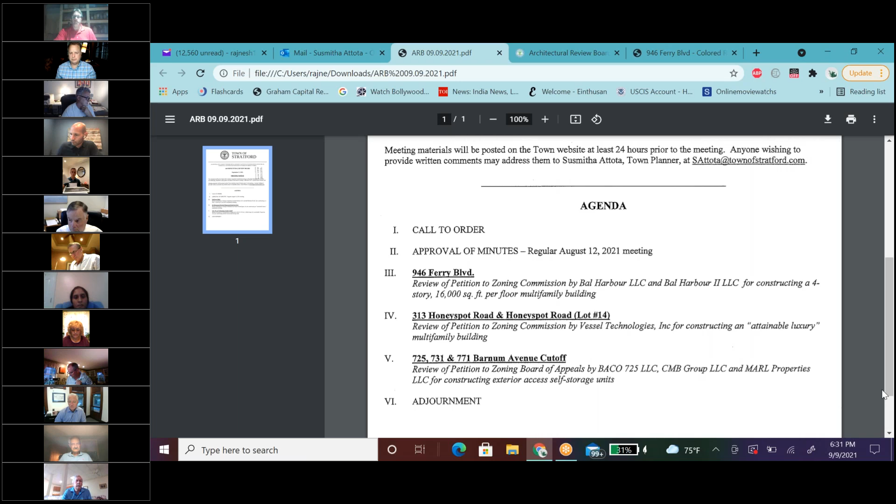I'd like to make a motion to approve the August minutes as recorded. Second? Second. Steve Law, all in favor, say aye. Aye. Aye. All opposed? Meeting minutes approved unanimously. Next on the agenda, petition of 946 Ferry Boulevard, review of petition to zoning commission by Bal Harbour LLC and Bal Harbour II LLC for constructing a 4-story, 16,000 square foot per floor multifamily building.

I'm not sure who's taking the stage here, but why don't you guys take it away? This is Paul Sobel. I represent the applicant, and we have with us tonight Anthony Salsi, he's a principal. I'm not sure if Tony Nazzaro is on yet, he is a principal. We have John Cruitt, the project architect, and David Bjorklund, the project engineer.

So I can start by turning it over to either Dave Bjorklund to review the site plan or John Cruitt to review the architecturals, whichever is the pleasure of the commission or the board. Either or, up to you guys, however you'd like to proceed. Hey, Dave, how about if you begin with the site plan?

Yeah, so I'm going to make Dave the presenter. Dave, do you have drawings on your screen, or do you want me to share my screen? If you could share your screen, that would be preferable. Okay, 1 second. I think Susmitha has the S1 layout, that would be the one I would want to work from, and she also has the landscape plan. So which one do you want me to open here? S1 layout? Yes, please. Okay.

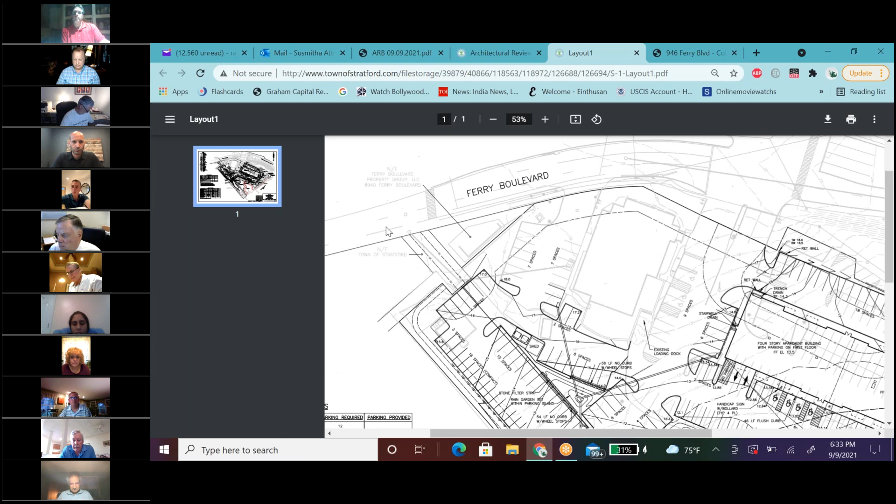I'm sure most of the members know, my name is Dave Bjorklund. I'm president of the firm of Spath Bjorklund Associates, and we have offices in Monroe. We are the civil site consultants on this proposed development. We're working in coordination with Davison Environmental with regards to the tidal wetlands located on site, and with Environmental Land Solutions, Matt Pop, who has done the landscape design. I think everybody's familiar with the site. This is the site of the River Bistro restaurant, and then there is a large parking area associated with it.

Just 1 second. For the record, I want to announce that committee member John Zabel has arrived, because when we are voting, I want to be very sure that all members had the same information to vote from. Okay. All right, you can continue now.

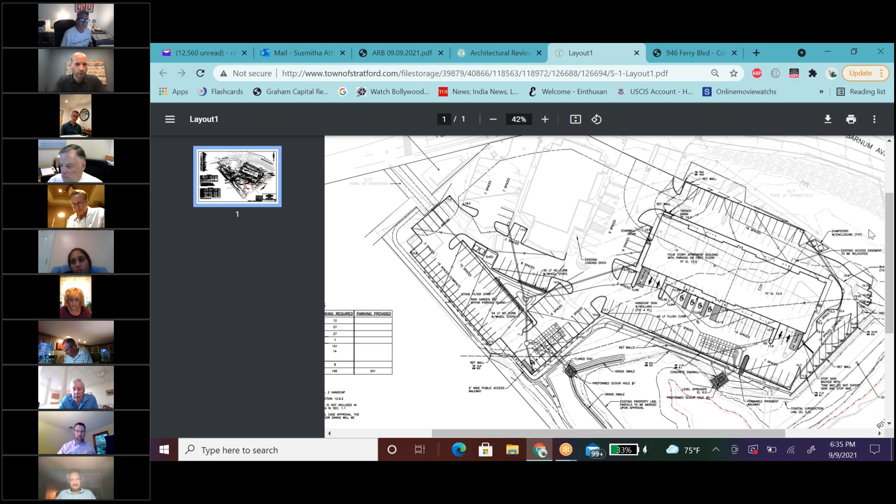The proposal here is to maintain the existing restaurant as it is today, in its current location. And then there's a large parking area which was developed years ago to the east of the existing restaurant. The proposal is to construct the apartment building on that existing paved area. We're not encroaching off of that paved area. There's also some waterfront improvements. There's a boardwalk that runs along the river and access to a dock that runs down to the river that will provide public access to the river.

In the previous approval of the restaurant, there were to be 8 public parking spaces designated for public use and access of the public to the water. This plan does recognize that proposal, and those parking spaces are located on the southeast side. They're located, you can see them, just southeast of the existing restaurant.

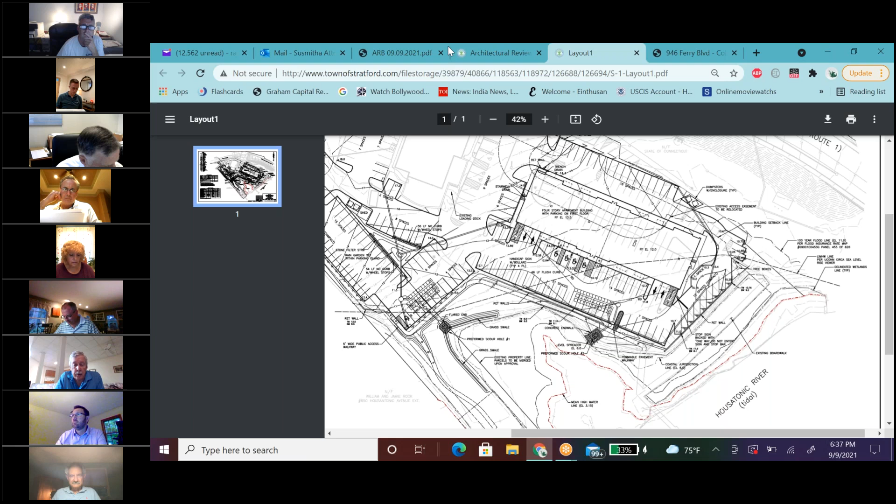The access to the Ferry Boulevard, Barnum Avenue cutoff is the same. We're not proposing to fill any of the tidal wetlands. We've recognized the mean high water mark. We have a very detailed stormwater detention plan that is part of the proposal that complies with DEP requirements with regards to detention and water quality. So if you visit the site today and see the tidal wetlands to the south of the existing paved area, there's going to be no change in those. We are proposing to have parking under the building, which I'll let John Cruitt get into. This is going to be served by existing sanitary sewers on the site and public water.

That's basically a rundown of the site. I'll turn it over to John now so he can talk about what I think is probably more important to the ARB, the building itself.

John? Okay, well, thank you very much.

Physically, the proposed project is a 4-story building with 16,000 square feet per floor.

Excuse me, John, for one moment. Which drawings or set of drawings would you like to have on the screen when you begin your presentation? The major difference between what was submitted to the Architectural Review Board and what I have is that I actually have catalog cuts of some of the materials that I propose to use. How important that is, we'll just play by ear.

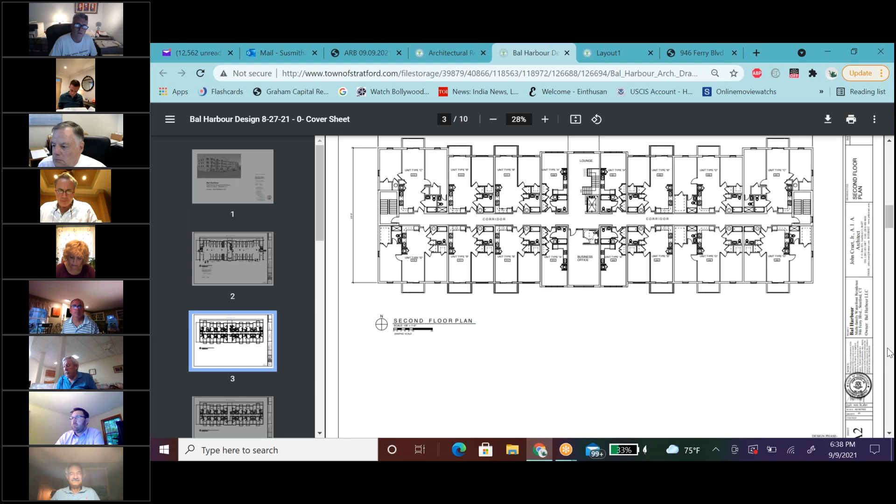Just for your information, Susmitha now has the August 27 set up on the screen, and that includes the latest roof plan set of drawings. I am very pleased and gratified to hear that, because one of the principal exhibits, which wasn't submitted earlier, was the roof plan.

The roof plan has some importance because we do propose to locate outdoor sections of mini splits on the roof, but I'll try to get into that particular aspect of the design a little bit later.

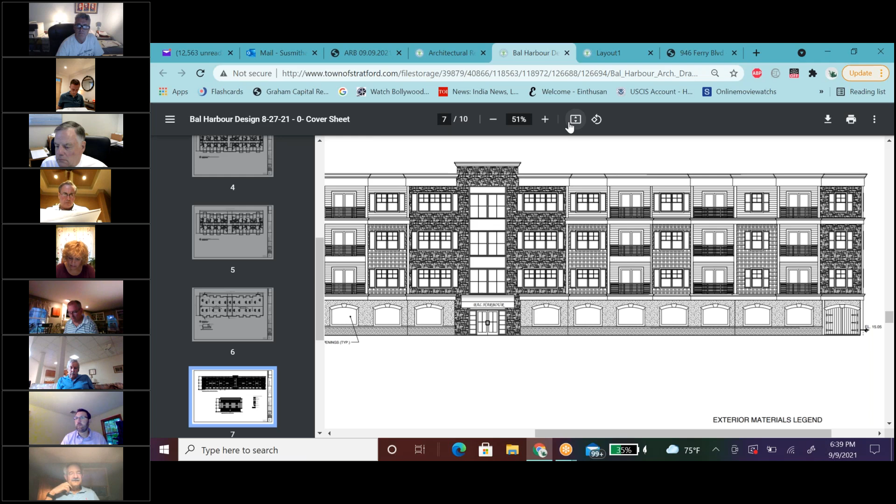What I want to try to do is go over the design, the massing, the elevations, what I propose to use for the various materials, the philosophy that is the backbone of this design, and other factors. So if I may, if you have a picture of the perspective, if you could put that up, that would be appreciated.

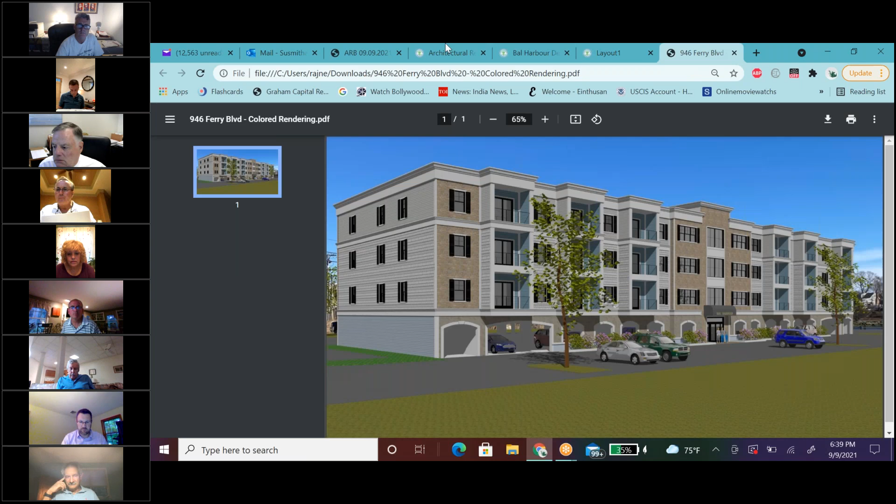Susmitha, would you be able to put up the color rendering? Yeah, can't you see it? There it is. Excellent, that's perfect. Yeah, it's just like my color rendering, so that's just fine.

The reason for that is it makes a good introduction to what I propose. The proposed project is a 4-story, 16,000 square foot per floor multifamily building with a mix of studio, 1- and 2-bedroom apartments.

One of the aspects of this particular project is I wanted the building to be elevated for a couple of reasons. One, because it's in a flood zone, and the flood zone allows us to park underneath the building and have our main entrance at that level. So the building is basically elevated some 12 feet above the existing grade.

This affords other opportunities. The elevation that you see is the southward facing view, and they have a very clear view of the lower Housatonic River and also Long Island Sound.

Now, there's an equal number of apartments on the north side, and because they are elevated enough, they will view the upriver section of the Housatonic River, along with the various marinas. They will have a pretty clear view of that. So basically, all of the units have waterfront views.

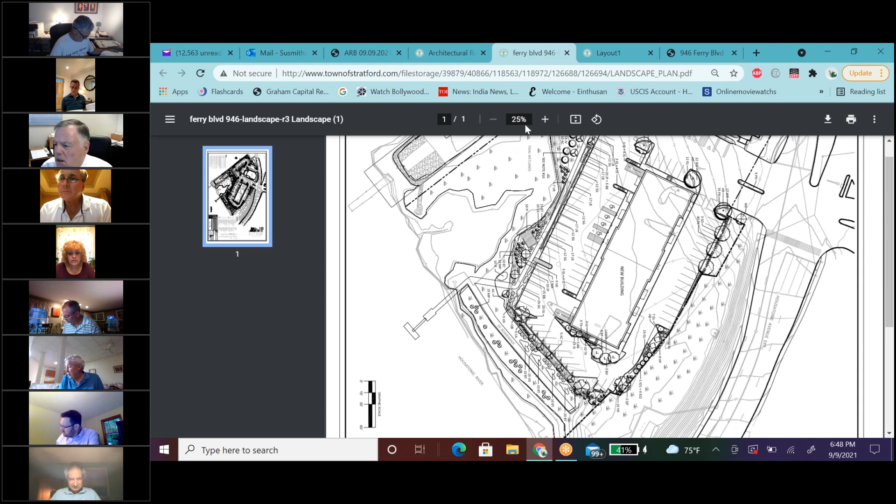If there are any, I'll try, but there's quite an extensive plant list. The planting is largely focused on creating a buffer area between the existing development, the existing paved area, and the tidal wetlands and the Housatonic River, and the existing boardwalk. There are plantings proposed around the building and around the existing parking area for the existing restaurant building. There will be a definite enhancement of landscaping, especially to the rear of the building.

We're limited as to what we can do in the front of the existing restaurant building, because when you look at the plan, most of that is owned by the State of Connecticut. It's part of the right of way for Washington.

Okay, thank you. And one more thing that may answer a question before it's asked. I see you have, it's a little confusing, what looks to be a lighting plan. I'm not sure who might speak to that, both site lighting and building lighting, but perhaps you have some information about that.

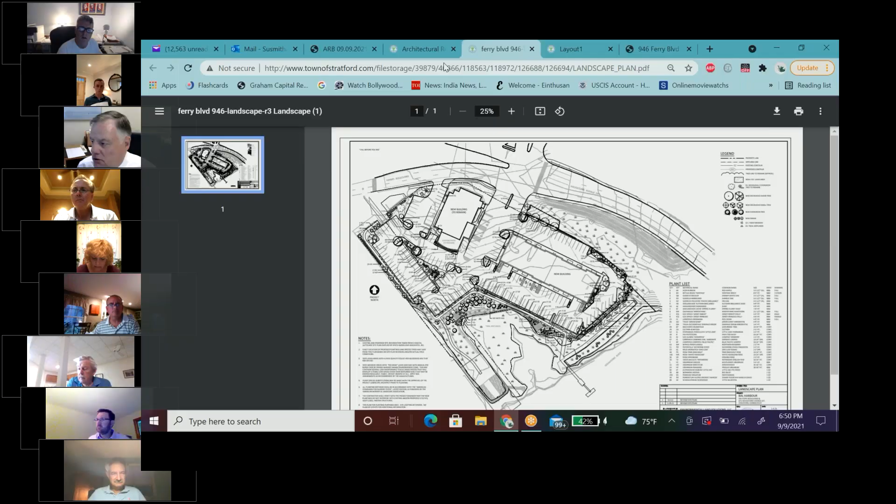We also have cut sheets for the fixtures. I know what I've discussed with Anthony Nazzardo is that these are all LED fixtures that have no spill. The light can be directed, and you'll see from that lighting drawing, I guess it's kind of small on the screen.

I'm trying to call it up on my screen from the town's website, that the foot candles really drop off around the perimeter of the property, so there's no spill. I imagine the commission may be familiar with this type of lighting fixture now, where it doesn't really radiate above, and it preserves dark sky, and it just illuminates the intended space with no spill.

Hey Tony, we're on with the architectural review board, just wondering. Okay, in addition to the lighting drawing, there are cut sheets for the lighting on the town's website.

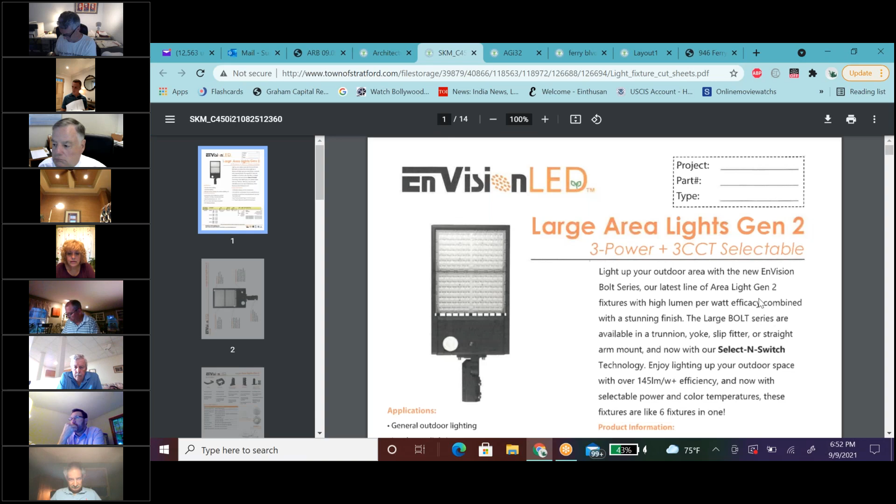I see the pole. I have copies of the site plan showing parking lot lighting, and I guess I'm trying to understand where the lampposts are. I can't quite make that out.

So getting back to the lighting plan, the drawing has little rectangles, and they're either blue, red, purple, or dark blue, with the fixture type for each described in the schedule. Okay, I see it, so those are the LED fixtures.

ARL2, and I think UNV is universal voltage, so they take a voltage input of... Tony can supply correct information if I'm incorrect, but I believe they take voltage inputs between 100 volts and 277, something like that. The wattage may be adjustable, but they're all specified as 100 watts on that schedule.

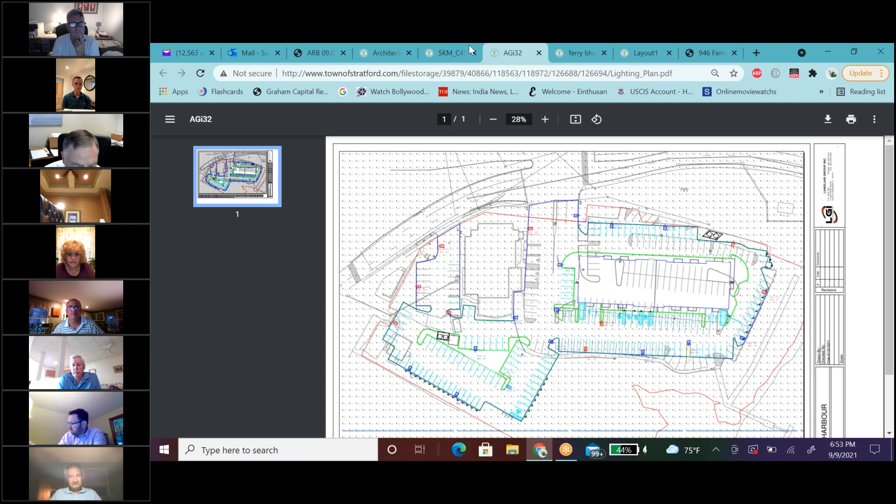Okay, so if that generally covers it, it may come up further in commentary from the commission. If you're all set, I'm going to go around the room to our commissioners one at a time for their commentary and questions. We are all set. Okay, I will start.

Tom Sharkowitz, board member: I'd like to ask a question about the presentation. Is the architect submitting this project the same architect that did Riverside Bistro a number of years ago? Yes. Okay, cool.

And how is this housing development being marketed? Is this more of a luxury development, a mid-level, or more of an affordable housing development? How do you envision this?

Anthony: Yeah, it's pretty much along the same lines as Ferry Boulevard Plaza. The floor plans are the same for the studios, 1-bedroom, and 2-bedroom units, but most of our units have a balcony except for the studios. Every unit has a view of the water, either looking south or north.

The price point will be a little higher because of the location, and there is no affordable component. But the price point now is averaging about $240 a square foot at Ferry Boulevard. We see our average price point here at around $260 to $265 a square foot. Okay, thank you.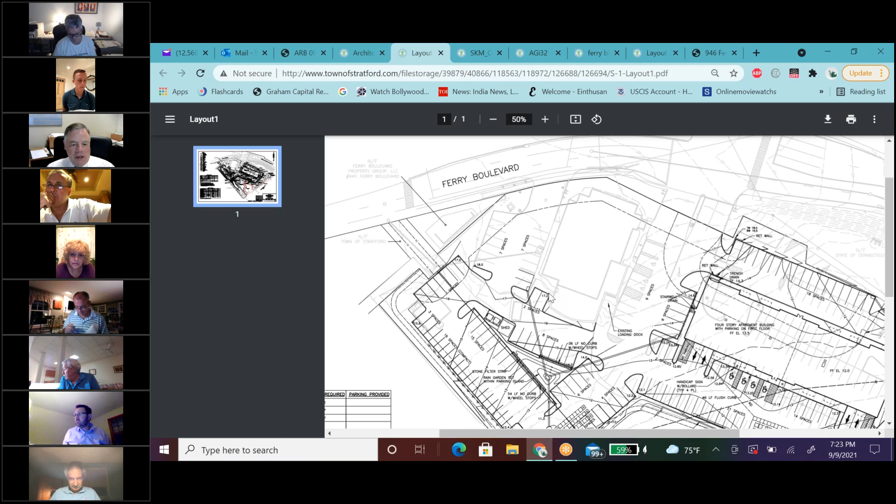Yes. Okay, so am I reading correctly that the 8 spots for public use are the ones to the south of the existing restaurant building, directly adjacent to the existing patio? Correct—no, excuse me, the public parking spaces are the ones directly south of the restaurant. There's a walkway that comes in from what is Washington Avenue, between the Danny's restaurant building and the Danny's parking lot. That walkway loops around the side of the property, and where it makes a right-hand turn to the northwest, that's where the parking spaces are.

Okay, so let me make sure I'm clear about which spaces. I thought it was the 8 spaces right next to the existing shed. Is that not right? No, that's not right. Drop southeasterly, and they're the 8 spaces that are adjacent to the existing wetlands.

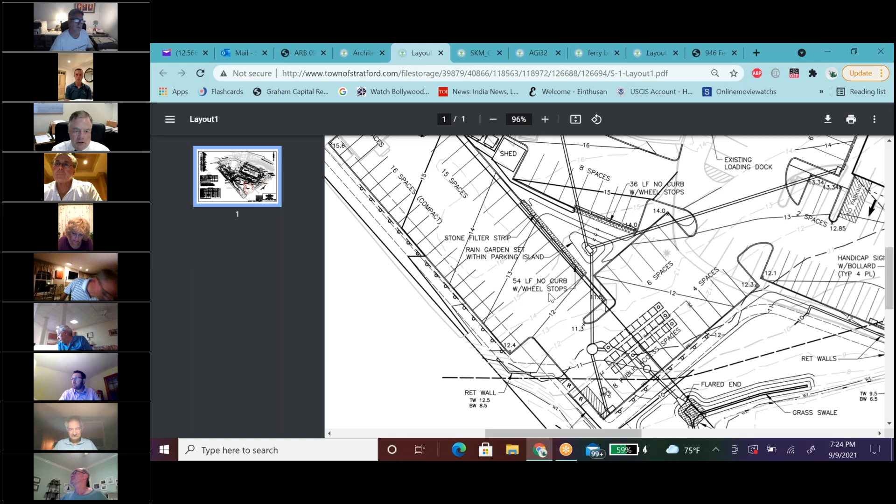Okay, it's hard to follow this, but there is direct access via walkways, not just walking across the parking lot, but the public who might park there has sidewalk access down to the boardwalk and to the dock. That's correct. Another access is in conjunction with the greenway. The plan would be that people traveling the greenway could access the property from what is left of Washington Avenue, which is actually a town road that splits the Danny's building and the Danny's parking lot. So they can bike or walk through that and go down around the walkway to get to the boardwalk, and that's the access.

Okay, so I just want to stay on the parking a little bit more. So you have more spaces than you need. And I also, this is going to be a question for Susmitha potentially: how close is this property to being in a TOD district?

Not very close, but I think this is a good case for a TOD expansion because it is on a major transit route, Ferry Boulevard. That's where I'm going with this.

The parking regulations in the TOD are less stringent than what you're showing, and I'm assuming that what you're showing is based on town requirements. So I'd like you to consider, in conjunction with the town, having this be built like a TOD project, and perhaps get some consideration from the town on the parking. I'm not sure exactly where there are potentially bus stops and things like that.

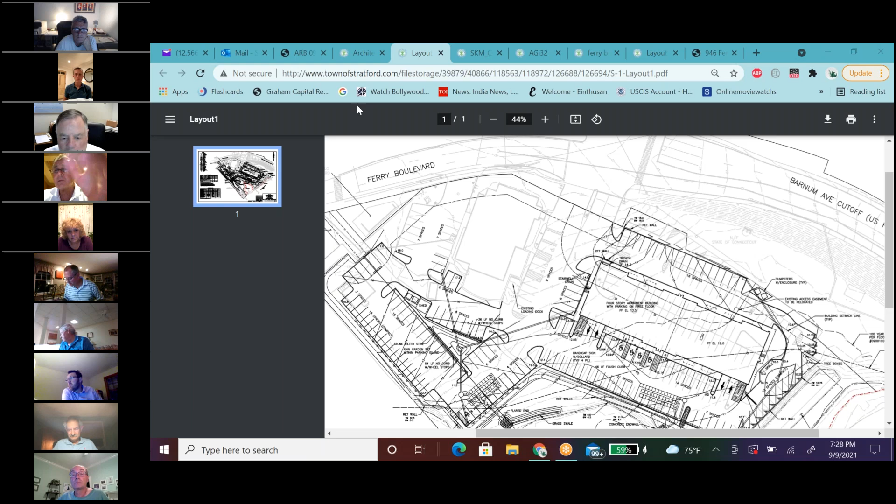Yeah, we have a DOT easement that has to be relocated, and you can see it within the footprint of the building, it's horseshoe shaped. I'm sorry, I'm not following that. There is a DOT easement to get trucks to the bridge to repair the bridge at any given moment, so there's an easement now that has to be relocated. The intent is to relocate that easement down along through this path that's 24 feet wide.

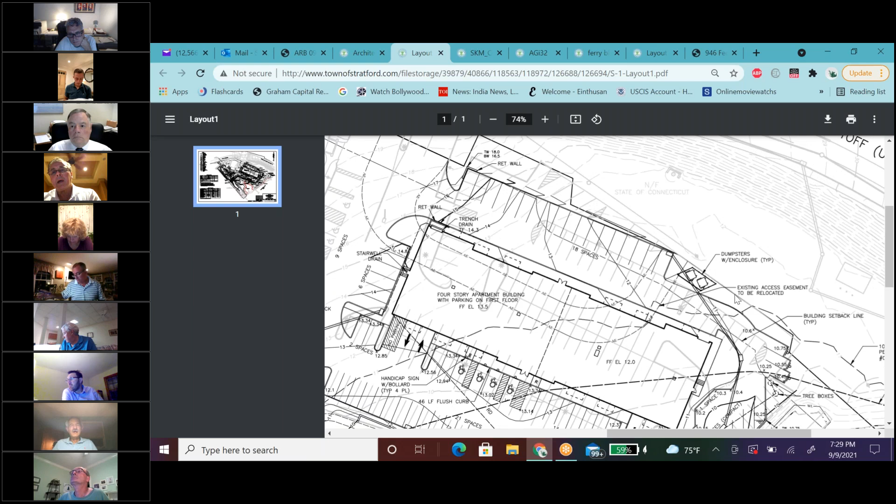Okay, if you're suggesting that's why it's 24 feet and it has to stay that way, maybe that's the case. Yeah, I believe so. So if you have a truck and a car trying to get into a space, we're gonna need that kind of area to accommodate that DOT easement.

Okay, well, I'll leave that up to you to determine. Access might not be used often, maybe on an emergency basis or a planned basis. You see the dotted line that says AE? The easement currently runs right through the building. We're proposing to put the building there, and we have to work with DOT to relocate that easement to put it in front of the building. Depending upon what DOT's requirements are for the relocation of that easement, they're going to have some say in what the width of that driveway is. Understood, and fair enough. Obviously, I'm not going to suggest that you can do that without their approval.

I'm heading back to the landscaping around the building. I understand and believe you would want to landscape around the building, but the distances from the southernmost point of the parking area adjacent to the wetland area to the northern side of the parking on the Barnum Avenue side - those sidewalks on either side of the building look to me only 4 or 5 feet wide. I'm not sure how you're getting any significant space to landscape around the building with the configuration the way it is right now. But I think the project itself would benefit, and Anthony, I think you touched on that - you realize that and want to do that, but I'm not sure you're going to have the room to do that as it's presently configured. So I think it'd be worthwhile to look at all the possibilities, including one-way driveways or smaller easements for the DOT, if that's acceptable.

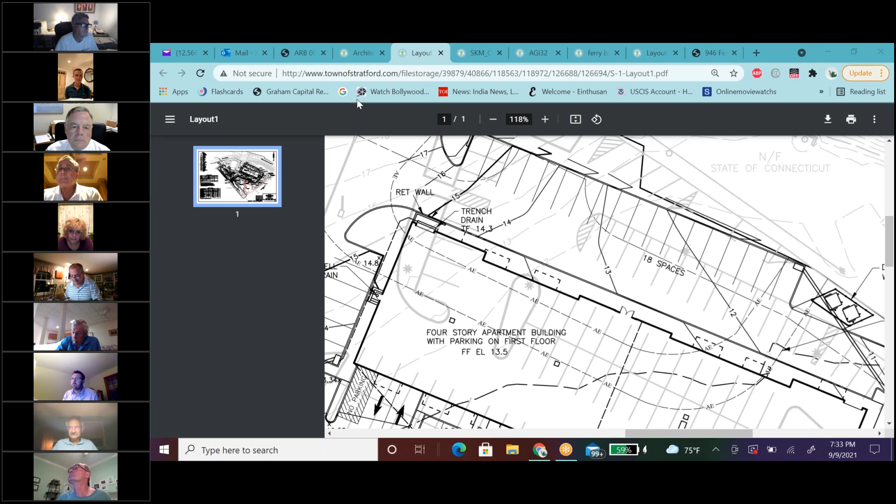And then the last one is just a little particular thing that bugs me - I'm assuming you're indicating shutters on the windows, is that correct? Correct. Am I reading that right, that those are shutters? Yes. Okay, so all I would ask is that you make sure the shutters are half the size of the windows - it's not graphically showing that way. Shutters in real life are meant to close over and protect the windows, and when you have a 3-foot wide window with 12-inch shutters on either side, I think it looks ridiculous. So make the shutters look like they're meant to be - that would be authentic and real. With a 2-bay or 3-bay window that's not possible, but with a single window that is the intent. Yes, and even on a 3-bay, if you look at old houses, they still would take the width of one of the units of the 3-bay and make it half the width of that window - that's kind of traditionally how it might be done.

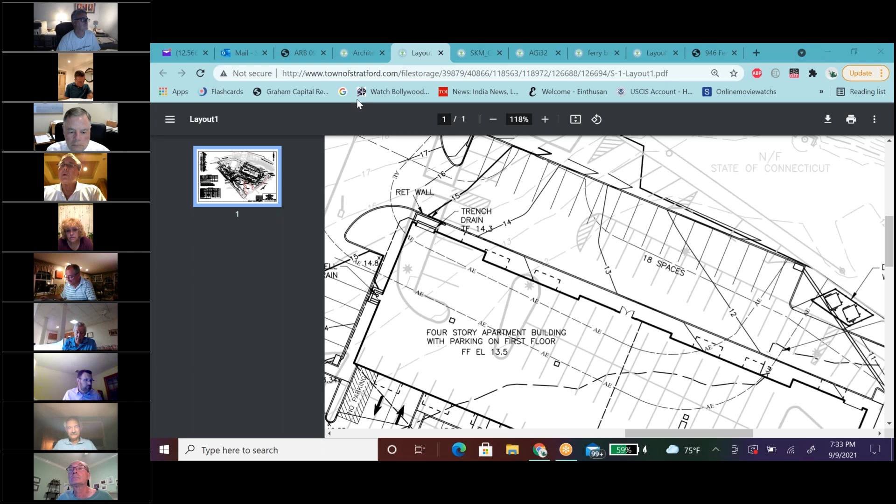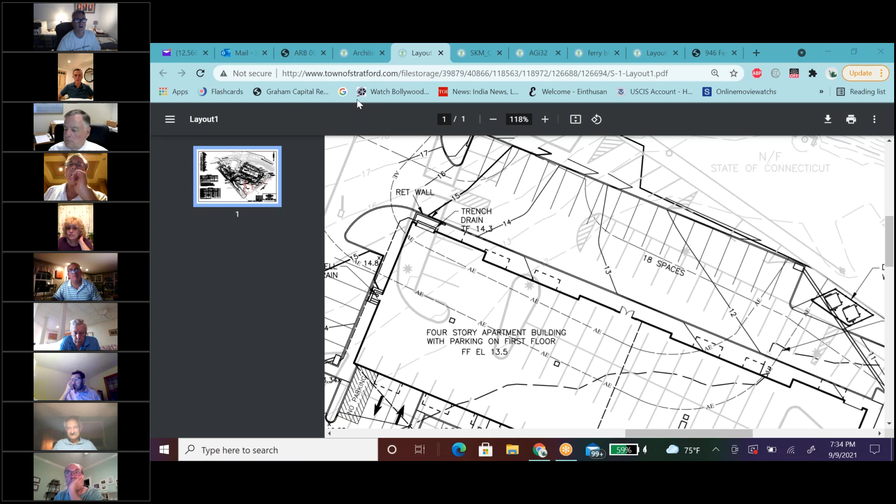I think you seriously have to consider the aesthetic effect and the balance between the window and the shutters. While I certainly will entertain the thought of trying to make the shutters for the single windows appear like they could be a permanent thing, I have to disagree with you on the double windows and the triple windows. I would eliminate them. I would suggest that you not have them on those windows then.

And, you know, we could have done every single window, but we actually changed the elevation halfway through construction by incorporating shutters and a couple of panels below the window on the second floor, tying in the second and third floor, tying in the lower window to the upper window. And it kind of broke up the symmetry of the shakes and the linear type siding.

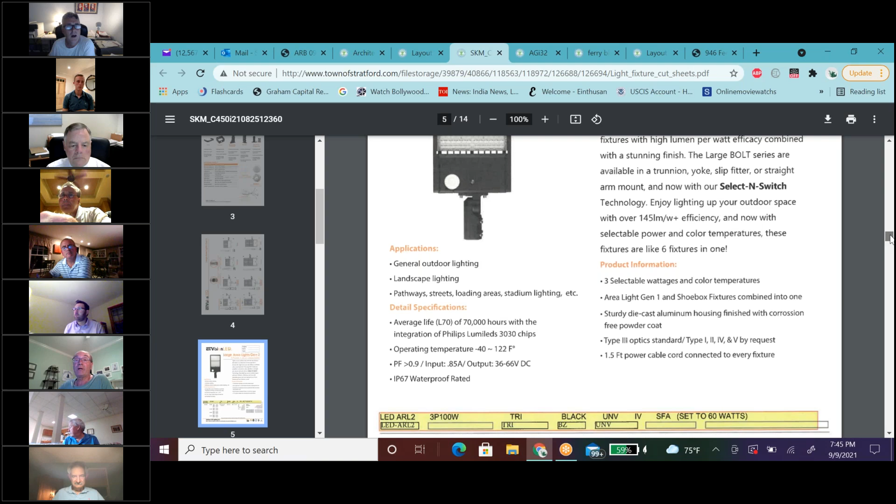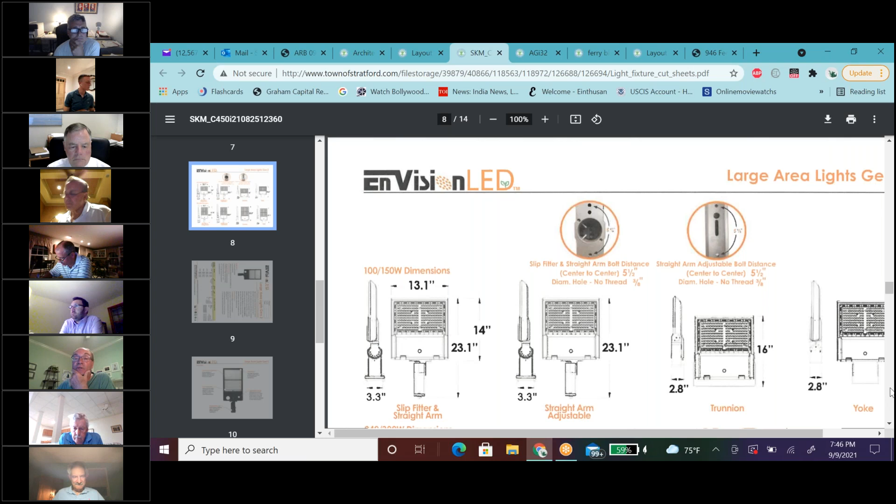What do you mean by traditional head? This seems kind of very contemporary. Are you saying more decorative? Yeah, more decorative. Well, I'm sure we can get a more decorative one, but Steve, my theory is I would like the lights to disappear. Those particular lights, parking, I don't particularly like parking lot lights to be a focal point. I would like the lights on the building to be a focal point, and on the general lighting in a parking lot, I'd like them to disappear. That's why I chose black.

Understood. What is the pole height? 18 feet.

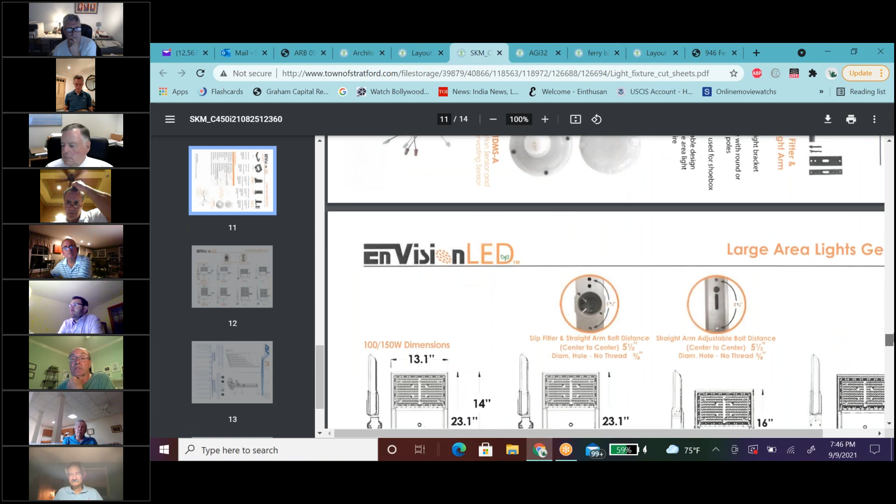The poles we're using are 18-foot poles. Can we bring that down a little lower, Tom? Is it possible? Sure, but do we need more? I don't particularly think that 18 feet is tremendously high, but yeah, of course.

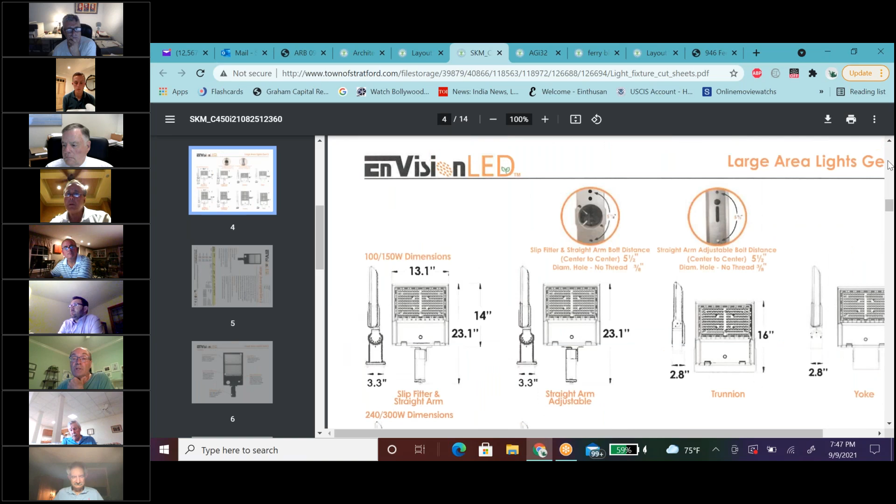What that does, obviously, is we have to take into account the distribution, the hot spots and cold spots within. So if you bring the poles down, you'd probably be adding poles. If you bring the height down, you'd be adding poles.

Are we talking 18 feet from the top of the base to the top of the fixture, or 18 feet from grade to the top of the fixture? 18 feet from the base. So a 18-foot pole, we're actually at about 20 to 22 feet. Well, I don't think you're going to have that high of a base, but certainly a 2-foot base would be standard. Yeah, so say 20 feet.

What do we have at Ferry Boulevard? That one fixture that lights up the whole parking lot, that's a 14, isn't it? No, that's a 20-footer. These are actually 2 feet lower.

Okay, well, I don't know if there's any other thoughts from the other commissioners.

James, just a couple other comments. I see, John, you've updated us with a roof plan, and I see roof drains. I assume those are all internal drains? They're all internal drains, yes. Okay, so will we need relief scuppers also in that parapet, or?

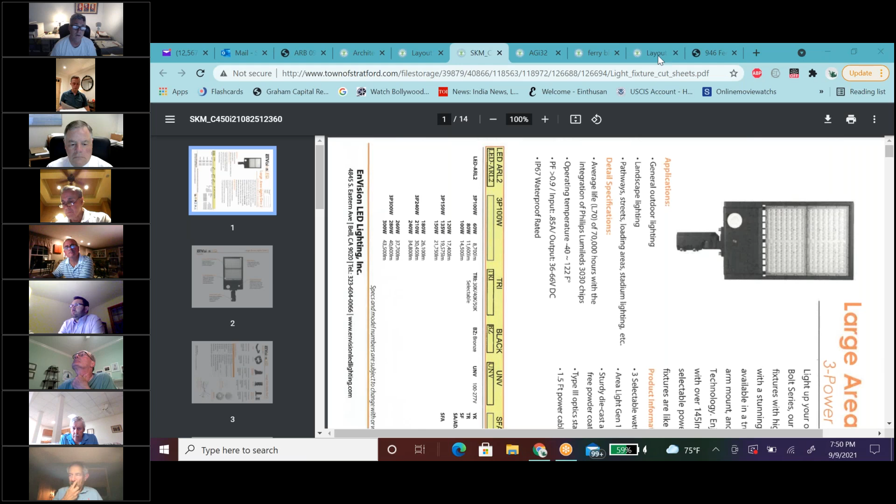One other question, Jamie, is there a transformer? I didn't see a transformer anywhere on the site plan. Did I miss it? I think the transformer is located near the existing restaurant.

You know, I thought, this is Tony, I thought we did put, Dave, if I'm not correct, I think we did put a proposed location for a transformer. I know we're always under tight restrictions from the utilities, but we like to keep them in discrete places if we can. No, absolutely.

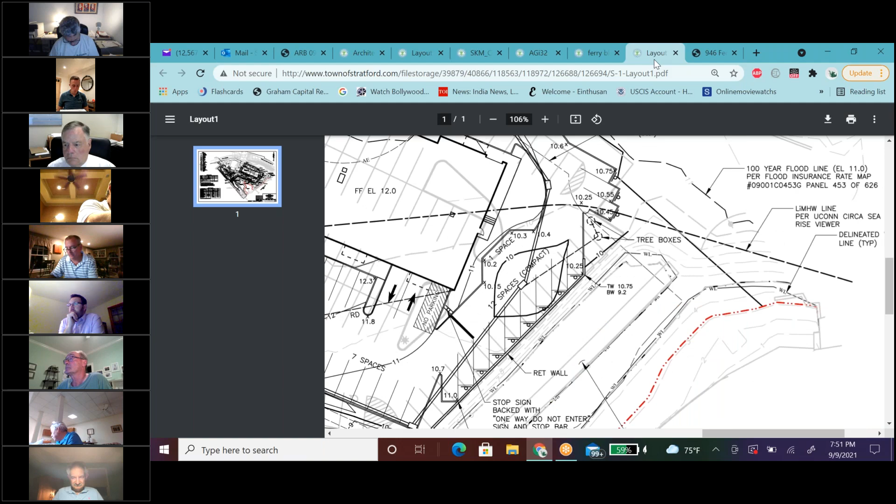That's all I had, Jamie. Okay, thanks, Steve. You know, I think we've hit on everything. I don't need to reiterate anything else. So if there's not any further presentation from the applicant, I think that we can close on this. Susmitha, maybe chime in here. Are we gonna make recommendations after each application, correct? We haven't had many multiple applications before.

Yes, and especially now that we're all remote, this is not the easiest. I was writing some notes about my own commentary, but now we have to try and come up with a list of our recommendations. I'm almost feeling like maybe we go around the room and everyone quickly, since this has been pretty lengthy, puts the bullet points from your commentary that you'd like to see as part of our recommendation here. And then we compile those, Eileen will be jotting this down, into a comprehensive list.

Susmitha? I suggest you make a motion first and list your recommendations. And as you speak, if other members notice their concerns were already addressed in your list, they can eliminate that portion in their list and add to your list. Then finally, after the whole round, you can take a vote and say all yays or nays.

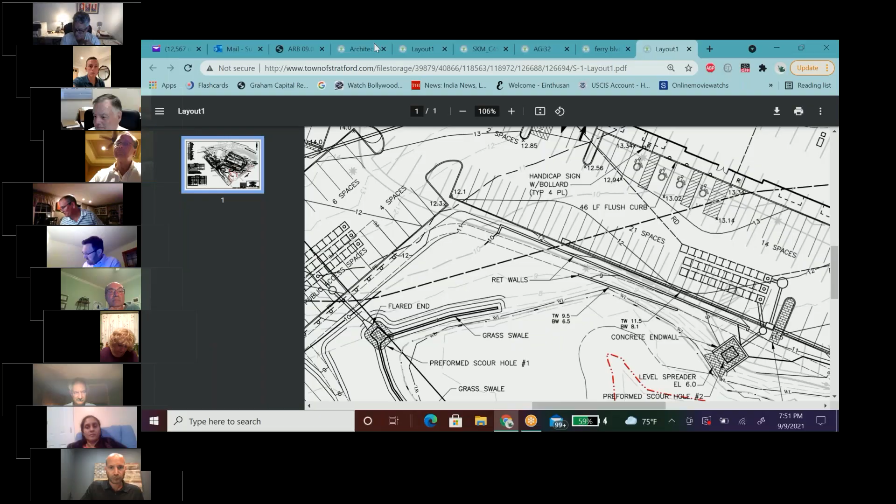Thank you, Tony. Okay, next on the agenda, 313 Honey Spot Road and Honey Spot Road, lot number 14, review of petition to zoning commission by Vessel Technologies, Inc. for constructing an attainable luxury multifamily building. Just gonna grab my...

All right, so I am not sure who is here representing the applicant, but whoever that might be, you have the floor. Good evening, this is Josh Levy, I'm one of the principals at Vessel Technologies. Thanks for making time to speak with us tonight. I know it's already been a long evening for everybody, so I will try to go through things as expeditiously as possible. I also have on the phone with me Suze King from BL, who is our civil engineer, so she will talk about different aspects of the site design.

Before we begin, I wanted to try to provide some background on Vessel and what you're being presented today, specifically looking at some of the things that I heard mentioned as comments or questions during the first presentation.

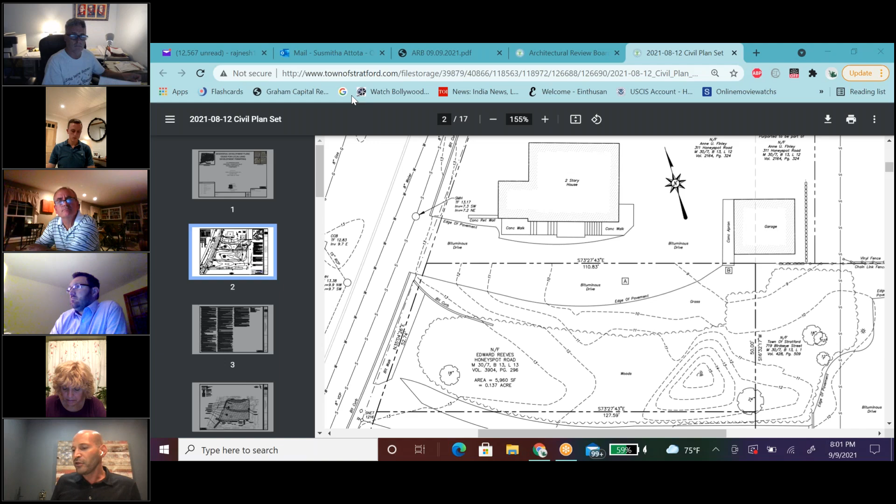We refer to this as an attainable luxury property. As a point in fact, the board made reference to the state as well as the municipality's desire to reach its 10% threshold. 100% of this property will be deed restricted at 80% AMI, providing affordable housing credit to the town for all 15 units. Additionally, we're working with the municipality on pre-leasing for community residents, for purposes of trying to have the most significant community impact we can have for people in the community who are looking for high quality housing.

We did refer to this as attainable luxury. One of the reasons we call ourselves attainable luxury, to steal a phrase from the retail industry, is because everything in the building is designed to meet luxury standards, but be priced at levels that regular people can afford. So you will find stainless steel appliances, washer dryers, dishwashers, and 9-foot ceilings all throughout the building. The building also has many, many unique features associated with it that you may have seen in the application.

For instance, it's integrated with our proprietary smart home technology system that we built from the ground up, which provides a lot of different features to residents. Some of those are 24/7 air monitoring and purification, UVC technology throughout the bathrooms to provide sterilization to the bathroom so that we always have clean surfaces, hearing and visual prompts for people who are hearing and visually impaired, and a lot of energy efficiency aspects of the building itself with respect to being able to promote and have the highest levels of energy efficiency.

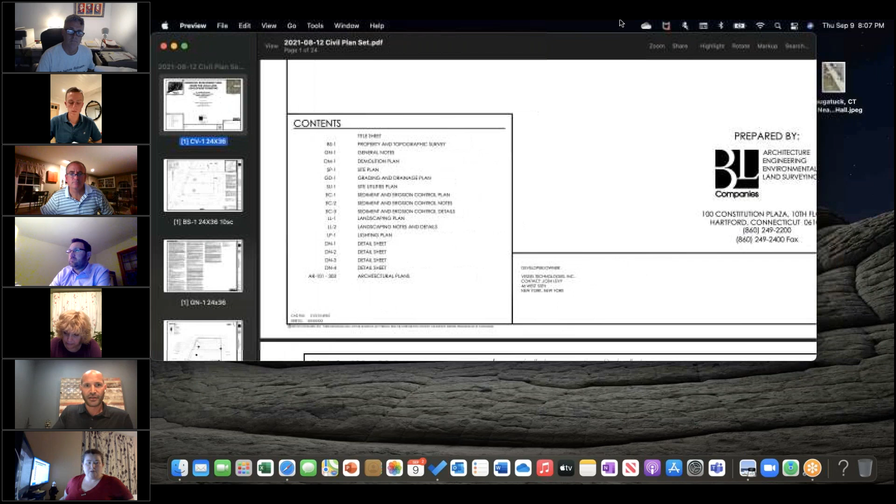Can you hear me? I can. Oh good. It looks like I'm still on mute. So the site plan is a pretty small footprint. We have the building as shown, and then right adjacent to it in the compact footprint is the parking. We have 15 parking stalls, including an accessible stall.

Right now we're showing typical asphalt. We're looking into seeing if there is a permeable type asphalt that would work well in this area. We know that with snow, sand and salt get in there, however they are continually coming up with new versions of permeable pavement to address that. So we're trying to find that, but for right now we have typical asphalt parking.

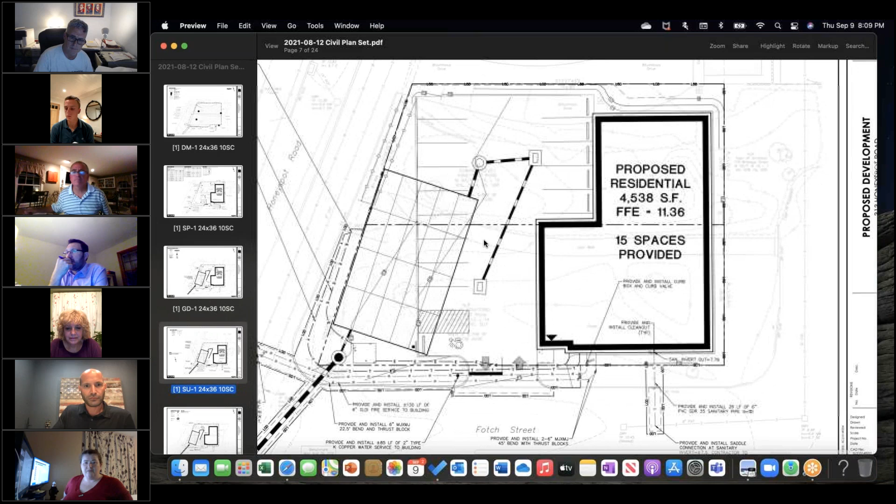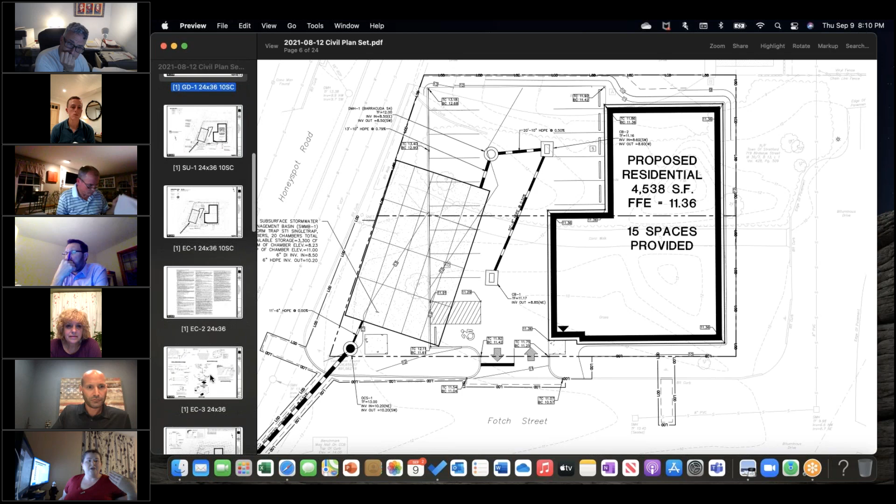Otherwise, it's pretty straightforward - a bituminous curb around the pavement area with a screening fence. And then for the landscape areas out front, there will be some low maintenance ornamental grasses, the kind that grow a few feet high, not just wild grass - ornamental grasses that grow sort of into a bush, to go along the fence and fill in that front landscape area.

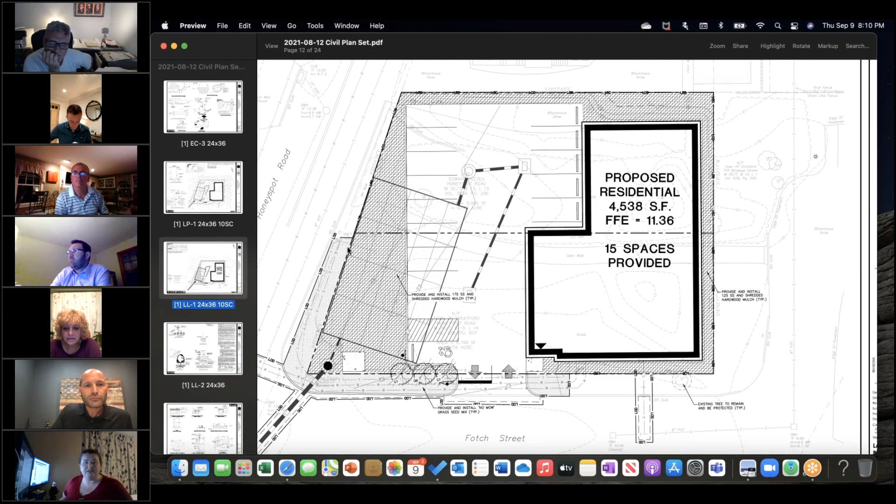There is a small portion within the public right of way, so that will be the typical low mow grass area. Around the back of the building will be a mulched area, I believe some grasses back there as well and off to the side. But for the most part it's a fairly minimized footprint in order to decrease the impact into the area. That's a good detail for the ground planting. So that was a quick overview - what questions can I answer?

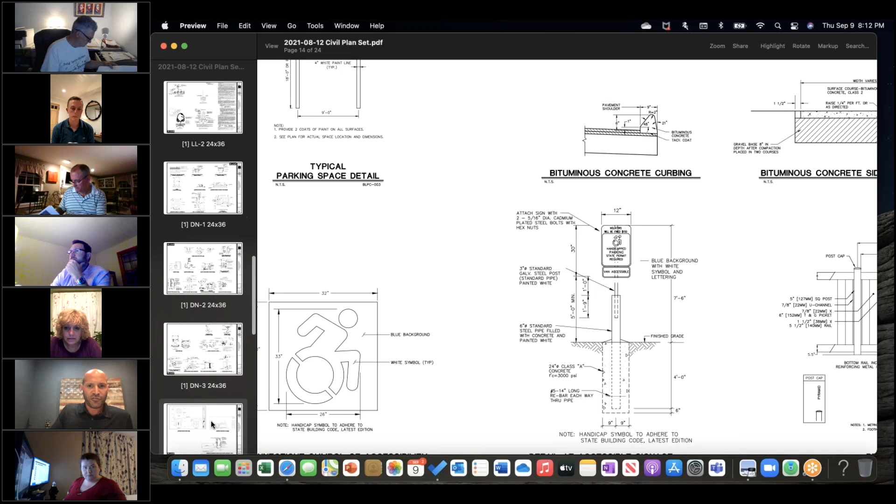Just to highlight a few things that were asked before in terms of the lighting plan - the post lighting in the parking lot, intended to light the parking lot, is both LED and solar. It's on a post approximately 20 feet high. Traditional curbs here - they're not asphalt curbs, they're bituminous concrete curbs for the site. As you saw, it's a fairly compact site, only about 100 by 100, so we're confined by the size of the site.

Let me see if there's anything else you had asked for previously. As Sue said, we're investigating how to create a pervious parking lot, either through the use of pavers or through pervious concrete or asphalt, based on what's viable given the location of the property and the climate. But the goal is to try to find a way to do that, if at all possible.

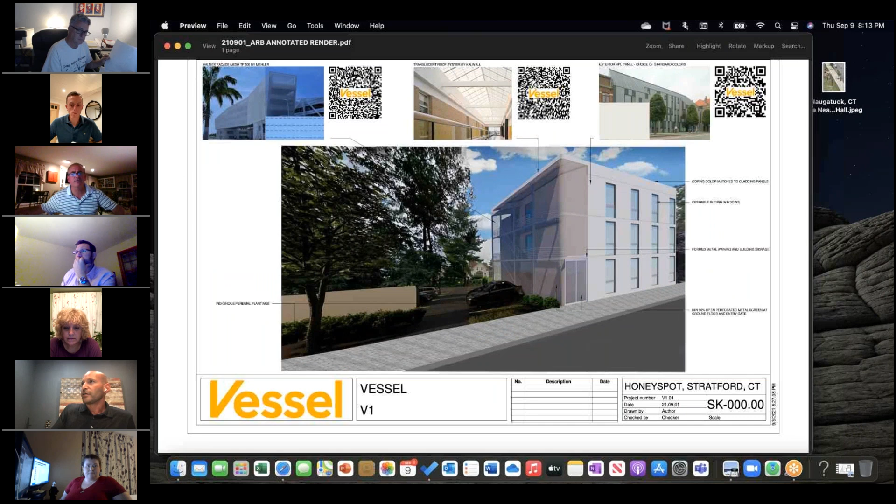So what you see here in the building is a few different things. I think everybody has this in the packet, but this area here is what's called a Valmex Facade Mesh, made by Mehler Texnologies. They have a lot of different examples of it.

The one I had shown in the rendering was this one wrapping, but it's used for a lot of different purposes. The idea is that it's a fairly translucent substance. It allows the transmission of air in and out, but it does block from inclement weather, rain, and other things like that.

That's coupled with a roof in this area that's a Kalwall roof. The Kalwall roof is a sky roof. It does two things: one, it lets in light; it also allows for the passage of air in and out. It forms a thermal chimney for purposes of creating greater energy efficiency, and allowing for the transfer of air while also protecting from inclement weather.

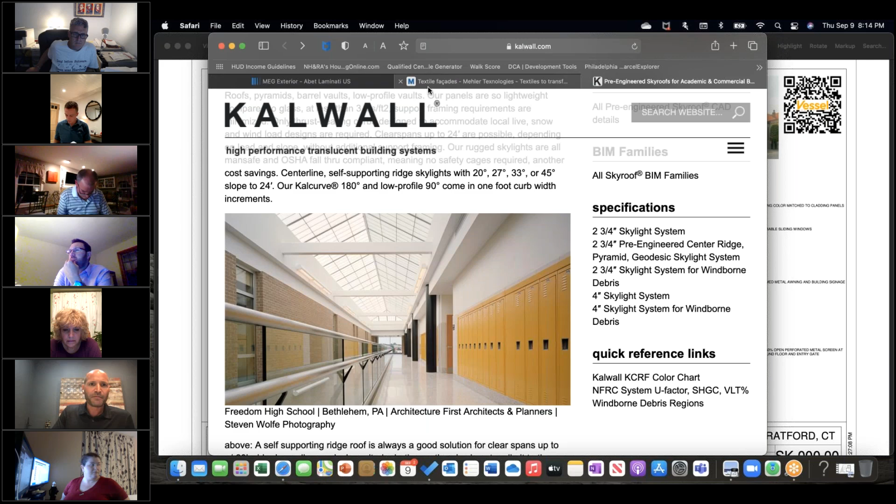And then the panels that you see over here across the rest of the building, those are Laminati panels. They are an Italian company that makes them. They come in a variety of different colors. I just brought this up on my screen to show everybody the different colors they come in. We showed one colorization, but we're able to make the building in a variety of different colors. It can be a single color, or it could be a multicolor structure.

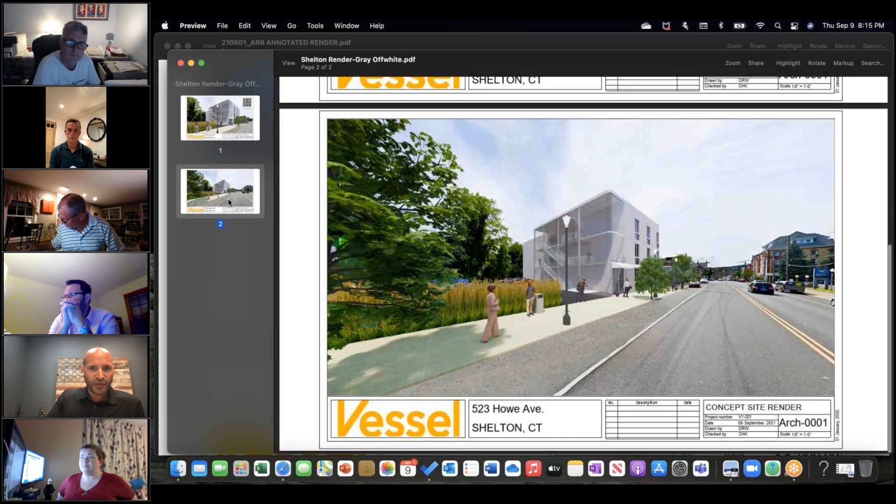I'll bring up a different rendering just for purposes of showing what that looks like on a site we're currently working on in a nearby town. So this is in Shelton, Connecticut. Well, that's not the one. That's the one I want.

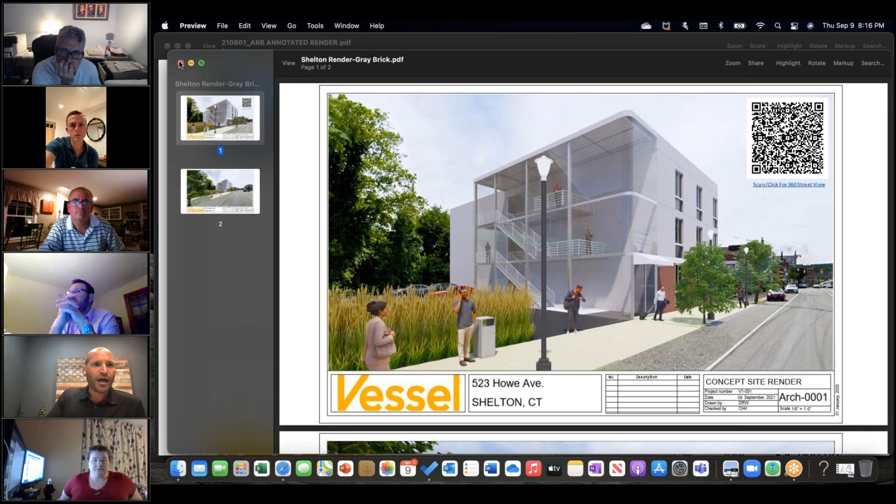So this one you'll see has a red panelization on the ground floor. It then has a white strip running in between, and this is a gray upper. Just showing this as an example of the ability to change the panel colors and to incorporate a multicolor design. Some municipalities we're working with, Shelton for one, wanted to see that as part of an option for theirs. And we certainly can accommodate both single and dual color structures for those purposes.

What else can I tell you? I think that takes care of most of that. I can go into other aspects of the roof or things like that, but I'm happy to pause if there are questions or specific discussion points.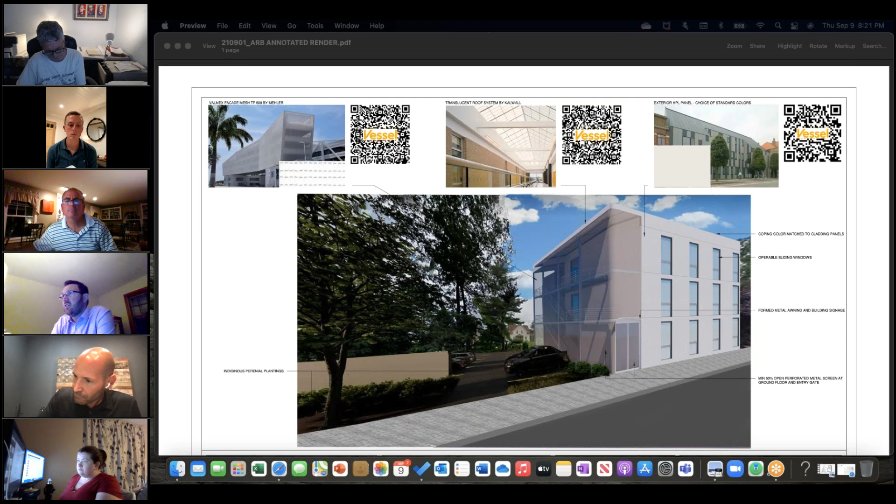I saw the transformer was placed in the front of the building. Guarding against that as much as possible — if there's potential for reconfiguring where the building is, all the better, so that transformer isn't just stuck out on the street, to aid in the visual aesthetics from Honeyspot Road, which is a very well-traveled thoroughfare in the town. That's it, Jamie. It's not a huge property, it's not a huge building with a lot of different details, so I'll let the commissioners weigh in — I've held a couple things in abeyance.

Sure. Go ahead, Josh, you want to respond to any of that? Yep, oh yeah, absolutely. I didn't want to interrupt. I apologize. Thank you for those comments. To try to address a few of them, and I'll let Suze also jump in.

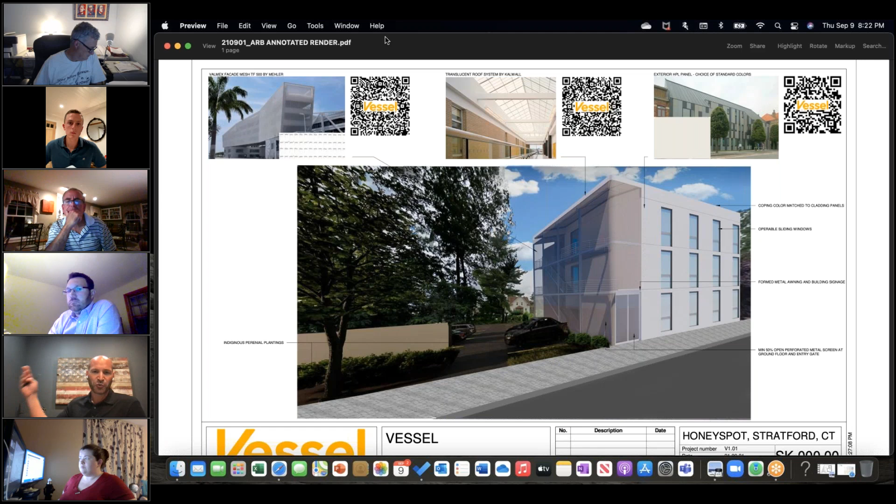Your point of Foch versus Honeyspot is interesting. I started out thinking we were going to front this on Honeyspot. What we were looking at was along Foch — in this area across the street are all small multifamily buildings, and Foch being quieter seemed like a better location for the tenants living there, as opposed to Honeyspot, which, as you put it, is well traveled and pretty busy. That's why we gravitated towards pulling it back onto Foch and having the parking going towards Honeyspot, so people living on Foch weren't looking predominantly at a parking lot. But we certainly could look at other options in terms of that.

I'll let Suze talk about the plant types. I think the plan includes multiple types of, as Suze put it, grasses. When we were on the phone with our landscape consultant, they had a few different ideas as to varieties so that it wouldn't look too uniform. So that's something we can definitely also look at.

Colors of the building, absolutely — we're happy, quite honestly, if there's a consensus on colorization, to defer to everybody. The idea is to really achieve something that's a community building, so to speak, and we welcome and enjoy the feedback in that respect so we can make it contextual.

Transformer — yeah, agreed, I hate transformers, I don't like when they're seen, and we'll certainly be looking for the most optimal place to put it. As Suze and Matt had put it, that's sort of a placeholder for where it is in case that's the only option. But we're certainly looking to see if we can minimize the transformer's impact on the site and see it as little as possible. Suze, anything you want to add here?

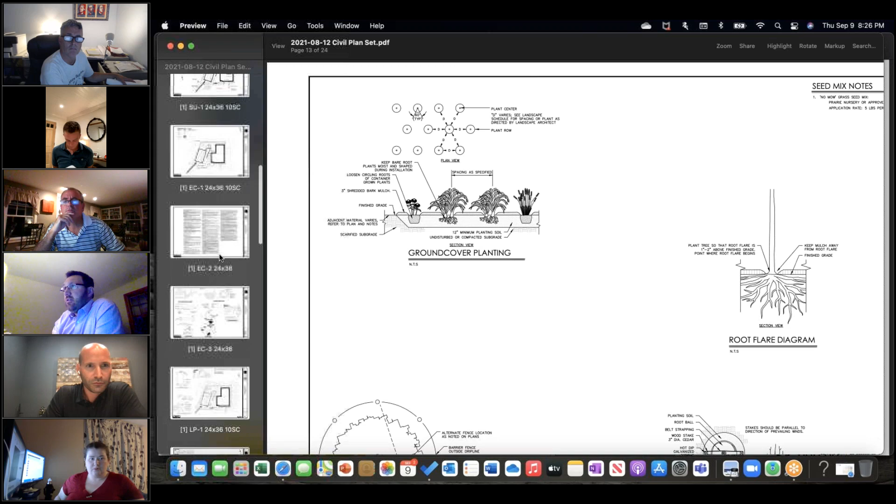It would be wrapping around the parking to screen it, a couple feet off the curb so there's space for snow on the parking side, but it would be maybe 3 feet or so behind the curb line coming around.

Okay, thank you. Okay, Tom Sharkowitz.

Tom Sharkowitz, board member. I'm finding it difficult to really review this project, and I'll start with this: this group spent quite a bit of time, and then quite a bit more on top of that, developing our design guidelines that were specific to the town of Stratford and would really improve the town and where we all live.

So I'm a little thrown off by why these drawings, while they respond to the individual parcel on Foch and Honeyspot, seem more like a drag-and-drop project that was not designed but rather placed here. I think that's evident in the drawings you submitted, which are actually sealed and stamped in the state of New Jersey, not even the state of Connecticut, as well as the project development you just shared with us of the same exact thing in Shelton.

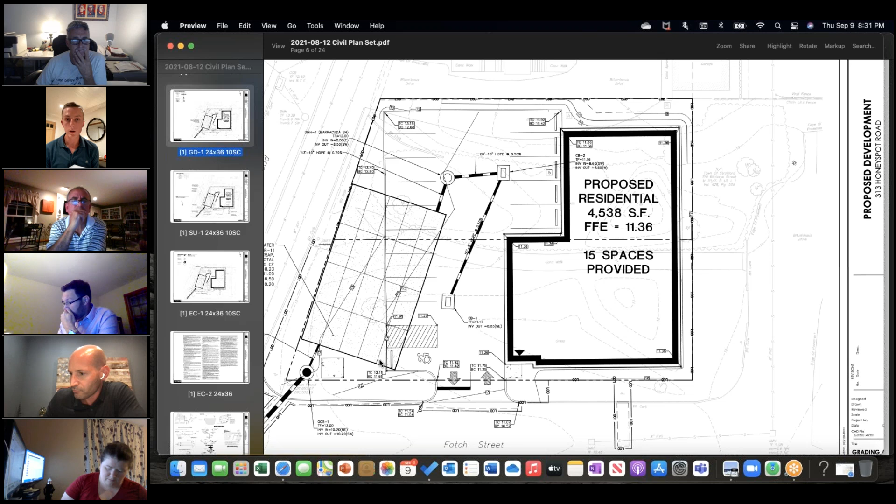It seems very plastic. It doesn't relate to the modern building that you've suggested here. And then really what we're left with on Honeyspot Road is a bunch of mulch and a white vinyl fence, which is not going to look attractive in all seasons.

However, I am not against the modern idea of building. I work in a very modern firm right now, and I think it's a welcome move into the future. But the drawings you provided, I think, lack a lot of detail. And actually, the renderings you showed from your project in Shelton, I think, are infinitely more successful than what you've provided us today, although I'm sure they're the same building.

I think that's all I have for now, but I'd like to hear what other members have to say. Thank you.

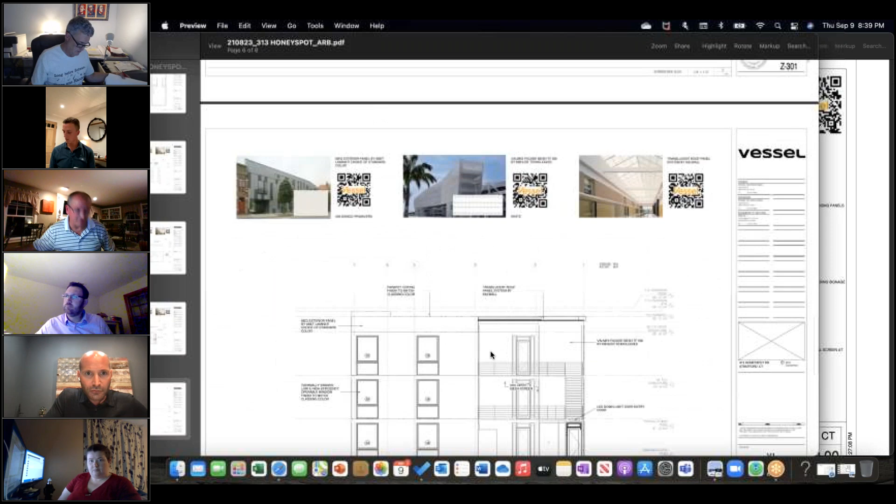If you look at Z301, it shows it sticks out like 8 inches maybe. Yeah, that's about right. You can see it here for purposes of the overhang.

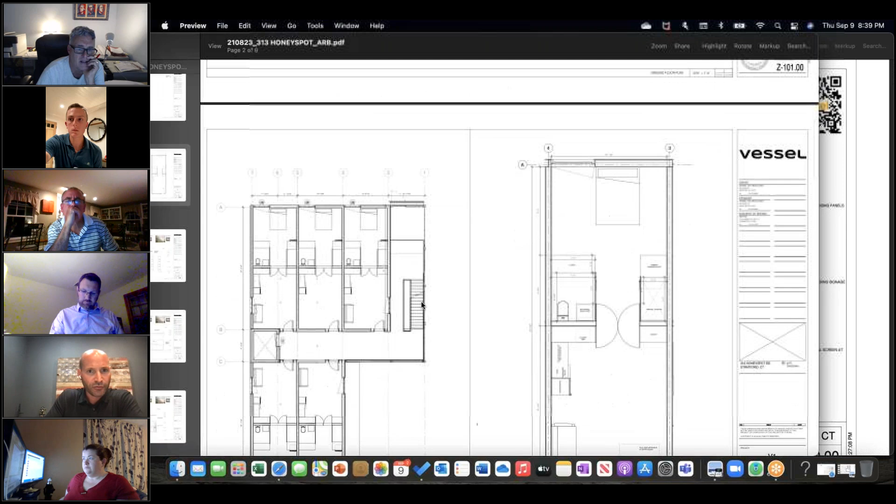And it's meant to just be a cover for people for inclement weather when coming in and out of the building. Yeah, it seems to be a little weak in that respect.

Well, Jamie, that's it. If you look at V1 also, you can see that's where the number of the building is, as well as the signage, and then there's an LED backlighting to that for purposes of providing downlight over the entry.

Okay, that's all I had, Jamie, at this point. Okay, thanks, Steve. Okay, Jamie Millward, Chairman.

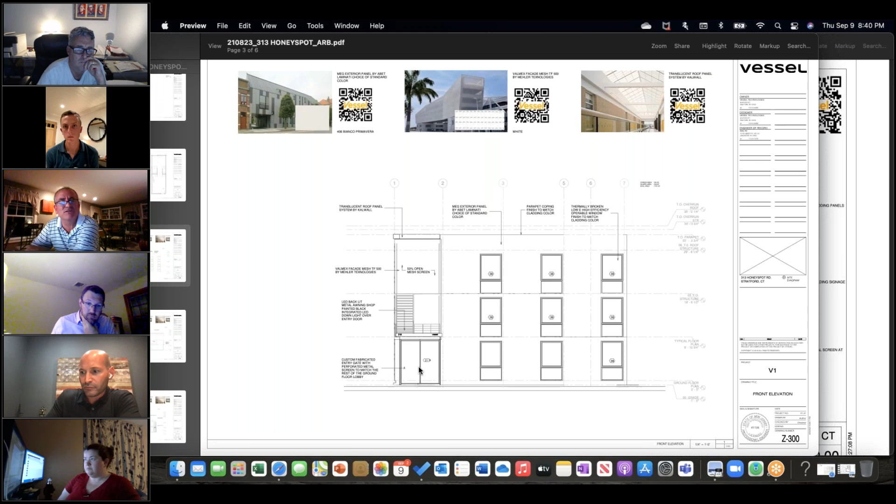All right, Josh. You know, I'm watching your expression, and you know, this is a tough project review. Let's start with that, because our kind of guidelines don't necessarily anticipate a project like that. But I'm going to take it from a little different tack, and that's that.

Here's what I really appreciate: I was on your website, and I did read about what you guys are trying to do. One of the things I wanted to ask you is, is this in fact the same building? You know, Tom referred to it, accurately perhaps, as plunk and place. You're replicating this exact same building on properties that you can find that this building will fit.

That's absolutely 100% correct. The only major difference is the changes to the colorization of the building. Yeah, that can be achieved on the exterior, and the building does get wider or shrink depending on the size of the site. Okay, and get taller. Okay, so I guess that...

I really like the concept of what you guys are trying to do, and I want to start with that, the positive here, because I think you guys are addressing something, trying to figure out a way to be creative about how to build, to provide housing that's not just the same projects we review all over the place, that gives an alternative to a housing program. And I don't know where the rent will actually be, but I'm guessing it's because it's modular in that way, it's less expensive to produce, and therefore you can charge less for the rent, all those kinds of things.

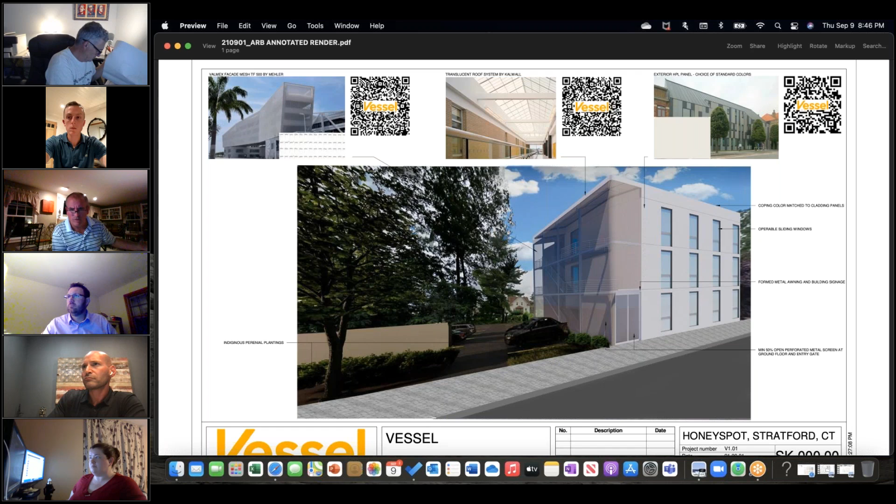I noticed on the site plan, I don't know where your building setbacks are. The only setback line I see is on your site plan. I'm on SP1, it talks about a parking setback, which you've exceeded. I'm not sure what that line represents, or where your actual building setback lines are. See, there's that on SP1 -- I don't know if that's SP1, actually I don't think it is, that's GD1. If you go to SP1, yeah, there's a line parallel to Honeyspot Road that says parking setback. I just don't know. And then I see a building setback line, which appears to be way over. I don't know.

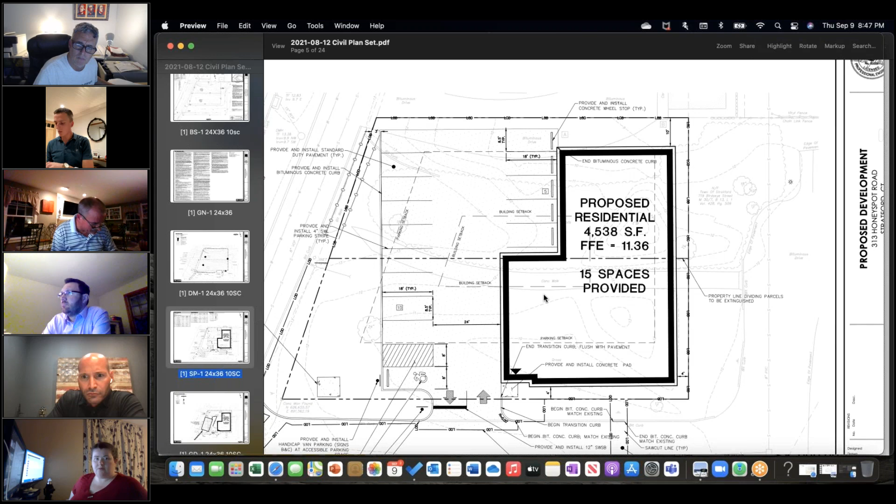I'm not sure, is this project requiring variances to your knowledge? No, it's a text amendment project. Oh, a text amendment project, I see. So you're trying to get them to write a text amendment which would allow you to do this. Yes, we've worked with Jay Havinsky on a text amendment for the site. Otherwise, as you aptly pointed out, under the current structure it wouldn't have met the current zoning of a 100 by 100 site.

Got it, okay. And that's your prerogative. I don't know if moving the building, as we're suggesting, would change the way that text amendment would need to be written or not, but that's again up to you to figure out. We're a recommending body, but we are going to make some comments. The comments about the landscaping, the fence, all those things, I think I agree with those. I think it falls short there, and I think that's all solved if the building is situated differently on the property, and then you'll be relooking at everything, the parking lot and everything in the back.

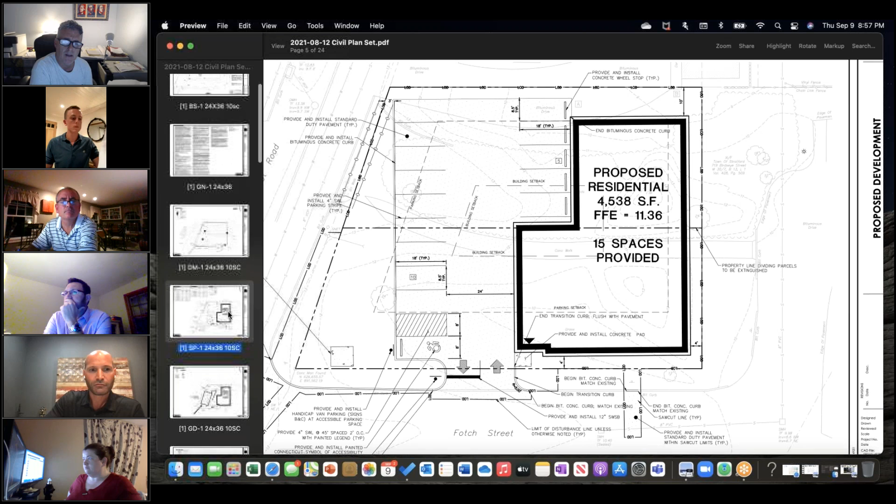Just a couple comments. There is, I do see a trash indicated on the first floor, but it looks like it conflicts with the couple parking spaces there that's shown on your screen there, Josh. So again, that would probably have to be rethought. And the other concern is just the parking lot pole height. I think, did I see 20-foot poles?

That's correct. Yeah, so again, that's a little bit, if we're trying to, this is a kind of a, it wants to be a sculptural gem of a building. And I think, you know, just bringing down the scale of the light poles would help as well. So that's all I have, Jamie.

Thanks, Steve. Okay, I have no further comments. I think we've beaten it around. So Josh, any further things you'd like to say before we deliberate?

You know, I guess just a couple of things. One, thank you first of all for the comments. I appreciate them. I also do understand the complexity of the job of an architectural review board, and in the face of a company that's trying to create affordability and accessibility to high quality housing by systematizing and productizing, we do not discount in any way the complexity of those two things together. We have this conversation a lot with review boards, and appreciate what needs to go into preserving communities and making them wonderful, beautiful places for people, and also at the same time creating greater accessibility and affordability and opportunity within the communities. So very appreciative of the engagement around that.

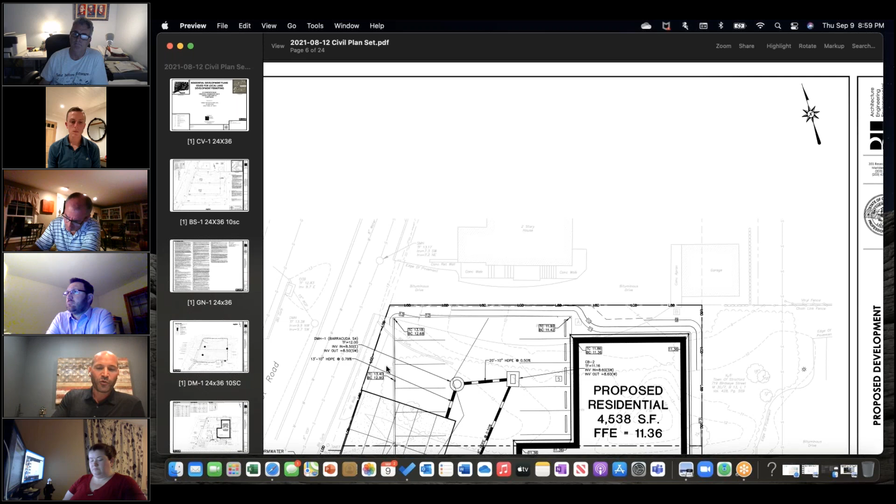I think I heard a few things that were common throughout the comments. One was the location of the building. We'll certainly go back and look at that and try to achieve the location where you're suggesting along Honeyspot, so that we can look to that.

It sounds like there was a lot of discussion around the landscaping and around the colorization. If there's any thoughts around a color palette, I'm happy to take those back with me to put into our thought process as we continue to finalize. If not, we'll certainly work on our end based on the feedback that was given.

The comment that was just made about the pole height, certainly something that feels fairly easy for us to look into and try to address there, as well as the pavement, which is in keeping with our goals of trying to create less of an environmental impact, and also not increase the heat index of areas.

And then, the landscaping, looking at different varieties, we'll certainly go back and look at that. Our goal with the landscaping is always to do something that looks nice but is also really durable. My partner and I have been running real estate properties for a little over 20 years, and what we continue to notice at all of our buildings is that things you put in that are ornamental, and you think are going to hold up well around buildings, end up being where people throw cigarettes and have their dogs and other things like that. They end up being the stuff that gets destroyed. So part of our goal is to always look for things that are durable and will look good long term, so as not to have problems associated with the landscaping. But we'll definitely look at that and look to see how we create a little more interest with different varieties and colorizations.

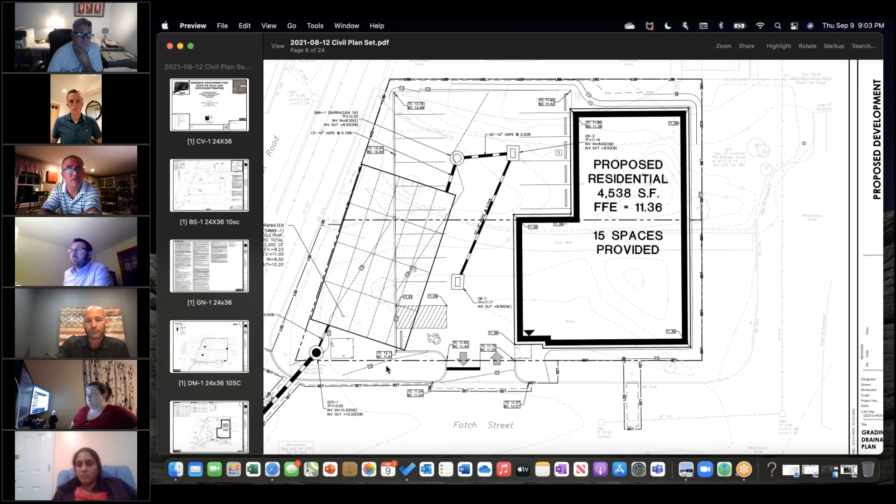Okay, thanks, Josh. All right, so now we commissioners need to kind of figure out how to address this project. Whether it's going to get a favorable recommendation or not is first and foremost. And even if we choose to give it not a favorable recommendation, we're advisory - it doesn't stop us from making suggestions about how we think the project might be improved, and suggesting that we'd like to see the project back in front of us again if those changes were made for our further commentary.

So I'm not sure how to get this started. I think, did we lose Tom? I lost his picture. But I think I'd like to start with you, Tom, about how you're feeling.

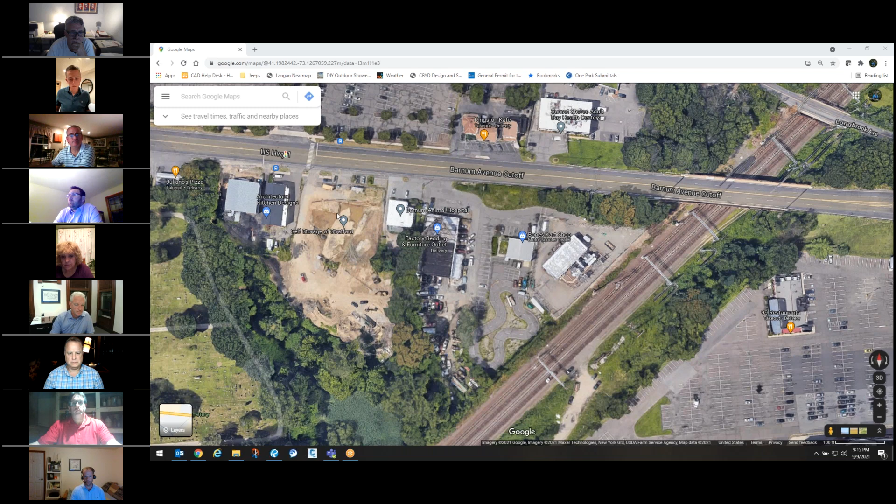We're here on Barnum Avenue Cutoff at the intersection of the Metro North Railroad. The sites, 725 and 735, are bounded by the Metro North Railroad, a UI substation, wetlands to the south, and the 771 parcel that John was speaking to, which we'll see in the street view, is the newly constructed self-storage building. The grade change between Barnum Avenue, where we're at about elevation 30, and the proposed site where these buildings will be located at elevation 9, is about 20 feet down from Barnum Ave.

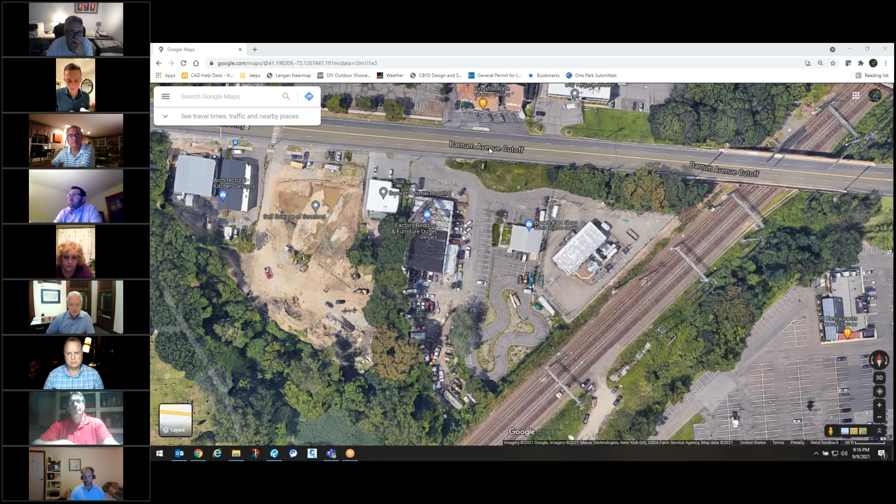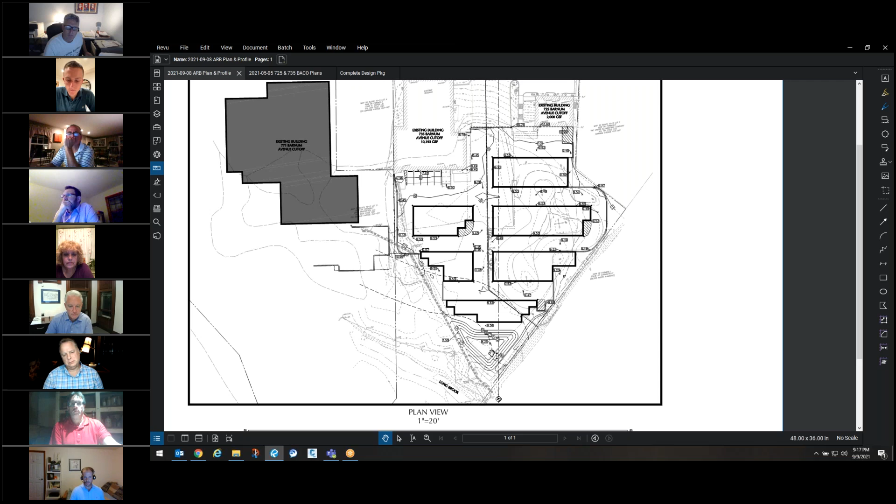I did prepare a profile to illustrate the change of topography a little more. This is our grading and drainage plan. You can see Barnum Ave up here, approximately elevation 30. We're not proposing to touch any of the properties in the front or the existing buildings there. In the rear, where you see the existing go-kart in the background, is where those vehicles are currently being stored. We've proposed 6 self-storage units, individual units you can drive up to, with drive aisles in between, and a small stormwater detention basin in the rear of the property abutting the wetlands. Our wetlands application was approved, so the plans submitted are those approved wetlands plans.

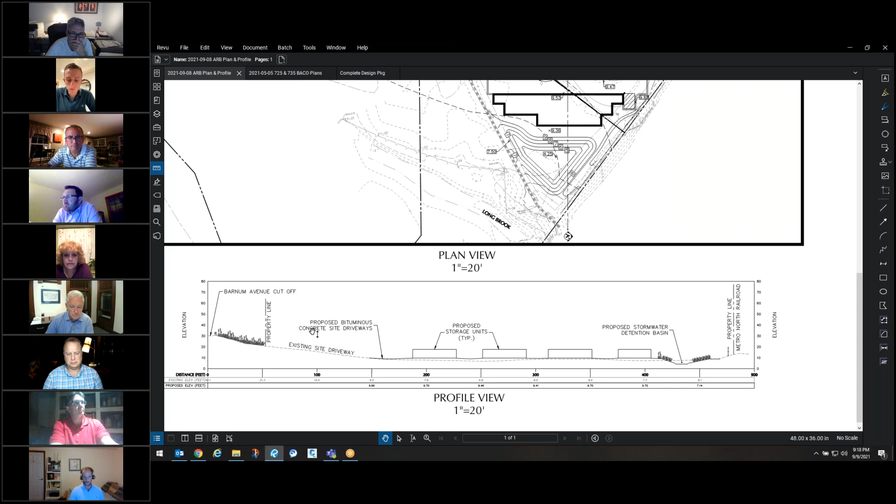Then I took a section through the center of the property at that location on Barnum Ave where, as I said, you'd have to be standing directly there to have a sight line to the rear. You can see these units are going to be well below Barnum Ave cutoff. I'm not sure if there's additional detail we want to get into on the site plan before we move to these photos.

Correct. And then these are just some photos of our site where these units are being proposed. So currently it's parking, the existing go-kart, and then in the rear is generally some storage areas currently. Not in the greatest of shapes, but the proposed plan takes over this area and is definitely an improvement.

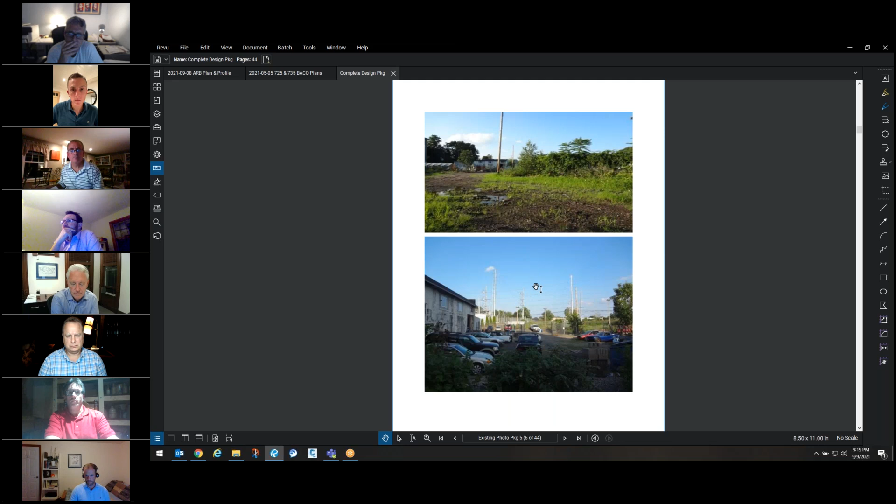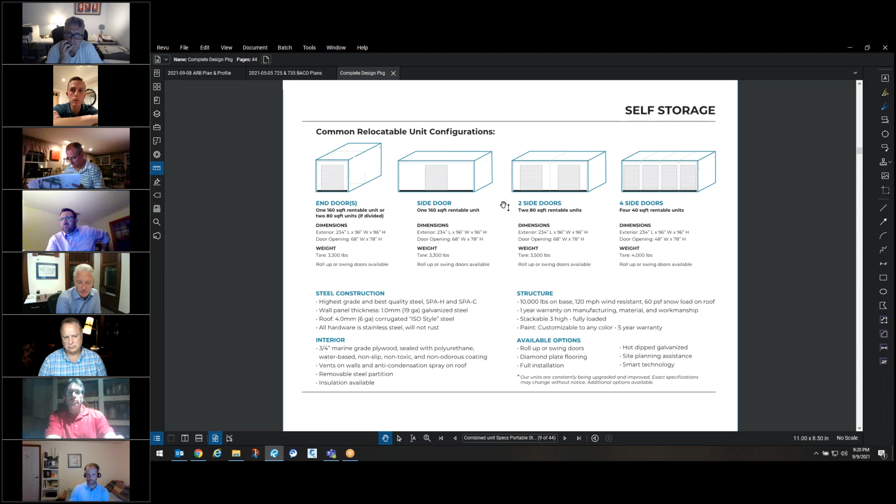I guess this moves into some of the units that are being proposed. I'm not sure if John, you want to take over this? We can scroll through this, but they're pretty typical, I would think. Yeah, these are literally sort of off-the-shelf units. You have your choice of a variety of colors. My client - these are depicted in blue and white, but we'd be proposing something that would be beige and white to match the existing self-storage facility. Really quite basic, not very tall, as we indicated, maybe too many times - these are about 12 feet tall at most, or 10.

I think 8 feet, okay, so even more so. So if they're sitting 20 feet down off of Barnum Avenue, you'd have to be looking through the two existing buildings to see the roofs of these buildings.

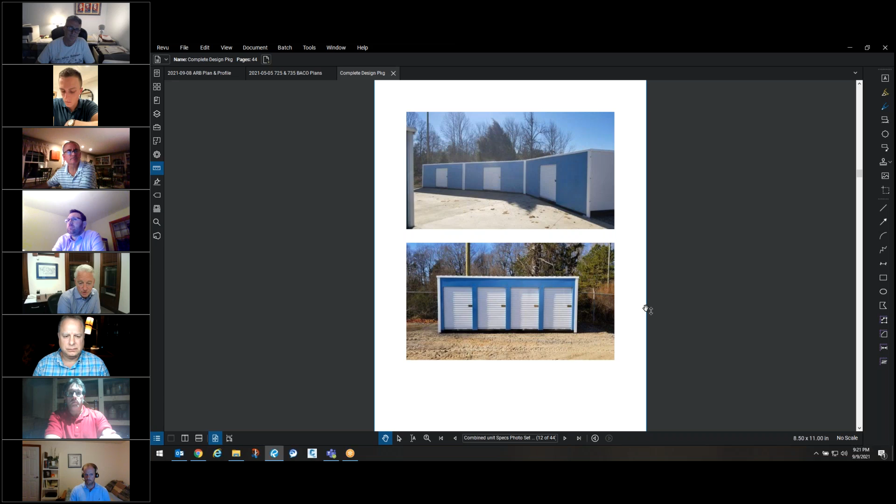This is sort of an interesting application for you to hear, considering the ones you've heard earlier this evening, because it's frankly sort of outside of your comfort zone in terms of your various expertise in architecture and landscaping, but nonetheless it's my client's goal to make this site as attractive as he possibly can. These two properties, as well as the original site, were very badly scarred, very badly taken care of. A lot of illegal and improper dumping had taken place. He's done a massive cleanup on all the sites, and this is a use that folks in Stratford need, folks everywhere need, particularly those moving into a multifamily building. So we'd be happy to answer any questions, to the extent that you feel this is within your purview.

Okay, thank you. I think we're gonna go around the room and see what people have to say. Tom Sharkowitz. Tom Sharkowitz, board member - just for clarification, the applicant...

The way what is proposed is access through the neighboring property. Right, yeah, so that's the - let's try not to get into the legal zoning regulation weeds. But so right, we have 3 properties, and I think Brian's trying to find us one that shows the existing property lines. This one does, and so because you can only have one principal use and one principal building on a lot, one of the things we're going to be doing is reconfiguring the lot lines such that these drive-up self-storage units will be on the same parcel as the existing self-storage facility, and then the other 2 lots would then stand on their own. Those 2 other parcels will still be fully compliant with your zoning regulations, but Jay and Susmita were very generous with their time, and we sat together for, I don't know, an hour and a half one day, sort of batting this back and forth.

As to how to tease this sort of thing apart in a manner that made the most sense under your zoning regulations. And this is what we settled upon. So at the end of the day, we're going to be before this board tonight, obviously, and then the ZBA simply for the variance for more than one principal building on the lots. After that, we don't need any other discretionary approvals from any commission, because the lot line adjustment is all over the counter, and in fact the use itself is permitted in the zone. So nothing from the zoning commission, nothing from the planning commission. Okay.

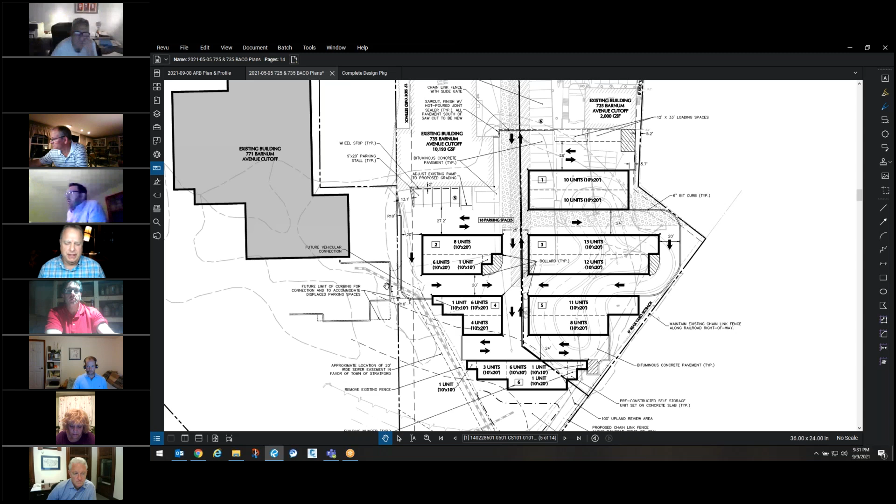This is Mark Bildner from Morrow Properties. There is an existing automated gate on the east side of the existing building as you come down the driveway. The customer will key punch in their code and the gate will open there, and that's how they'll access it.

It wasn't clear there. I guess I didn't realize there were security features on that building as well to get into the lot. Yes, sir.

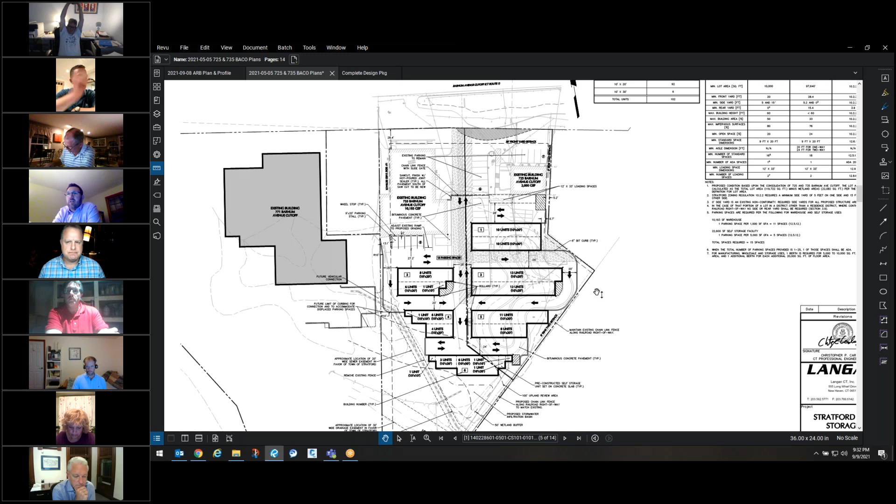I'd echo what Tom had said. I know there's probably going to be limited grass areas or limited curb cuts, but even at the entry there, this other entry with the gate, just anything you could do to spruce it up. Again, in terms of design, we're always thinking about what looks great from the street. And yes, while that's important for all of us as citizens and residents of the town and passersby, that's important. But also, I think for your customers visiting the facility - yeah, I'm going to a box out in the middle of a paved parking area - but anything to spruce it up and blend in with that natural color palette you guys have created, I think would go a long way.

The one question I had is, I'm not overly familiar with these type units. Is there dumpsters - say an individual renting space in one of these units is like, I don't want this lawnmower anymore, I'm tossing it - is there ability for them to do that on site, and if so, where is that located? No, typically we don't provide dumpsters for the customers. We really want them to take their garbage with them.

Okay, all right, that was just one thing I thought of. Not everyone is 'okay, I'm done with my unit.' I got to get rid of some stuff. Otherwise, we're in the garbage business, to be honest with you. Yeah, I would imagine. We used to watch that show where the people wouldn't come pick up their stuff out west. So I had to bring that up.

Okay, again, I think absent any recommendations we can make out in front of those other two buildings, which I guess to Susmita, that's not within our purview because it's not an area subject to this application. What other things are you talking about?

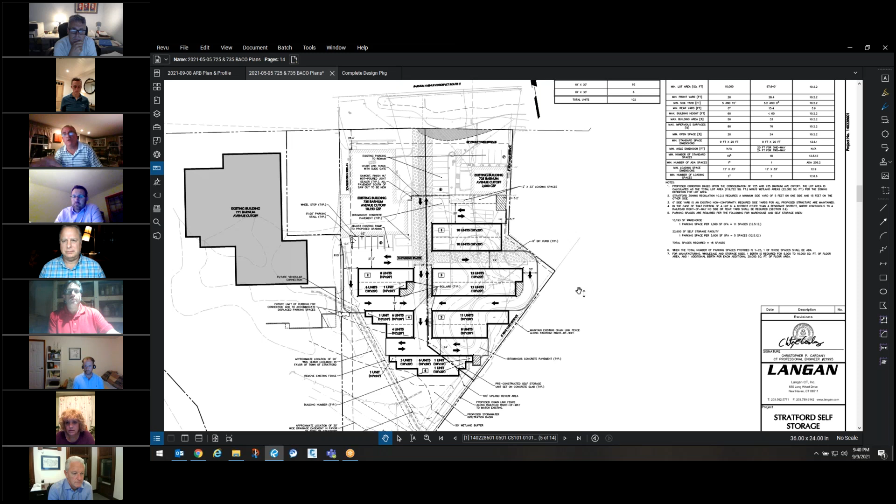I've driven down Barnum Avenue and looked down and seen the go-kart track, so you can clearly see where these buildings are going to be because I drive by and see those go-karts every time. So maybe this is the only use that could ever go there, but honestly I cannot in good conscience say that I favor this, because we're taking one of the two main drags in this town and plopping storage containers on it that you will see from Barnum Ave, by the way, you will see from the train. You could build your own, maybe really attractive looking ones, if you wanted to spend more money, and that would be a different story, maybe, although I still can't get past what's happening here.

I know you're going to say that's somehow out of my territory, but I'm looking at the plan of conservation and development, which we're also responsible for looking at, and that's part of what we discussed. Barnum Avenue was thought to be a place that the town of Stratford should be looking to improve the overall aesthetics of. And I just, you know...

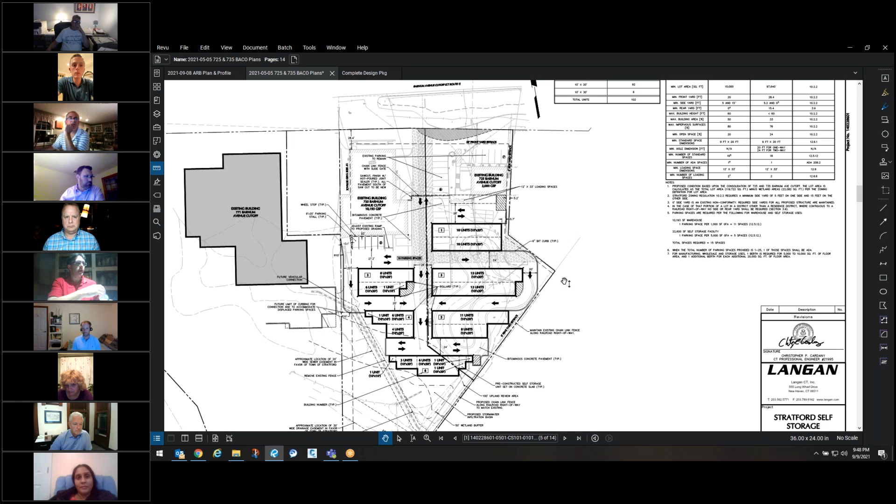So any other comments from board members? Okay, so we need to have a motion put forth.

Tom Sharkwood: I'd like to put forth a motion of a favorable recommendation for this project, considering that the chain link fence and gate will be upgraded to a nicer metal option, the colors will be muted as much as possible to blend in with the background, and the front two parcels will be cleaned up as much as possible, dumpsters hidden or removed, landscaping cleaned up, and greenery added.

Are there any other things any of the commissioners would like to add to that motion? Steve, John, no? Okay, is there a second to that motion? John Bell, board member: I will second that.

Okay, all in favor, say aye. Aye. Aye. All opposed, say nay. Nay. So that passes 3 to 1.